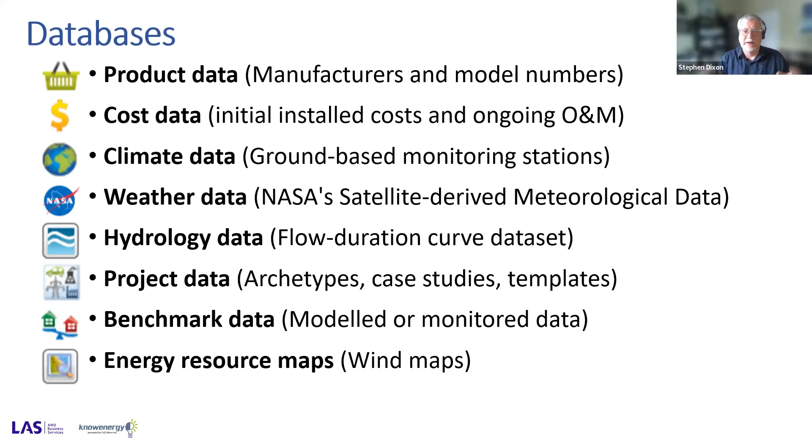Even things like hydrogeology data or hydrology data. If you have water courses in your municipality, maybe you want to look at the potential for hydropower at those sites. And there's actually resources in there for that. Benchmarking data and actually project data. I'm going to feature that one a little bit. Archetypes, obviously, case studies and templates. Lots of good built-in help. So that's the complete toolbox.

A quick little look here. So I'm not going to dive into any particular project right now. I'm just going to open up RETScreen. That's what it looks like when you open it up. It's going to give you a little bit of a tour of what's available. Right in the center, we call this the workflow wheel, or the workflow. It is basically all the things you can do and how we suggest you use RETScreen in the most fulsome manner. If I was doing an audit today, I'd use RETScreen. If I was developing a net zero plan, I would definitely use RETScreen.

So it can take me from the beginning, where I'm starting to gauge where I am, and benchmarking. It will take me through the smart project identifier. That's basically what the virtual energy analyzer is, but also the feasibility analysis in RETScreen, where I can determine how much energy is being used in my base and my proposed case, and my costs for my retrofits, and come up with my emission savings. A very powerful financial analysis tool, including, if you're doing large projects, risk and sensitivity analysis, very powerful.

And then eventually, once you've done that project, you've made that intervention. And for me, a project can be anything from awareness with people all the way through to a big project where you retrofit the building, deep retrofit, low carbon, or maybe put in renewables, or all those things.

Then we can actually measure data and do the analysis to report on the results, and continue that continuous improvement process for the sustainability, the persistence, and the energy efficiency of our building. So that's kind of all the bits and pieces there.

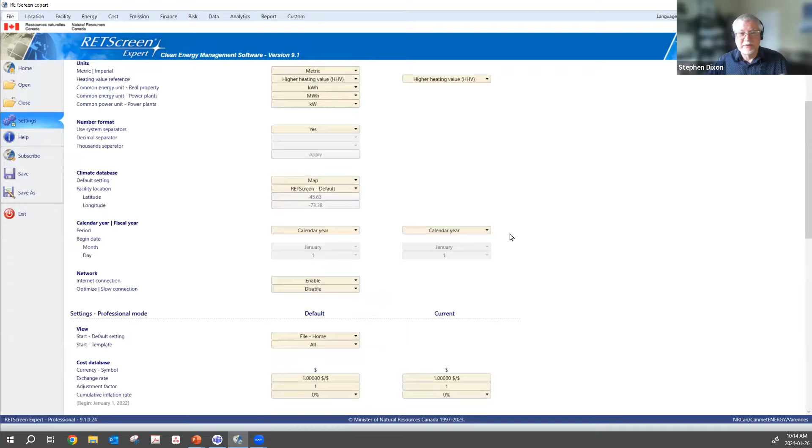So if we don't want Varennes, which is where RETScreen is based, as the default weather station, we can put the default weather station in here. We can build the units and different things. We can build in financial parameters. So for our organization, we have set assumptions around escalation, inflation, discount rate, and so on. Those can all be defaulted in here.

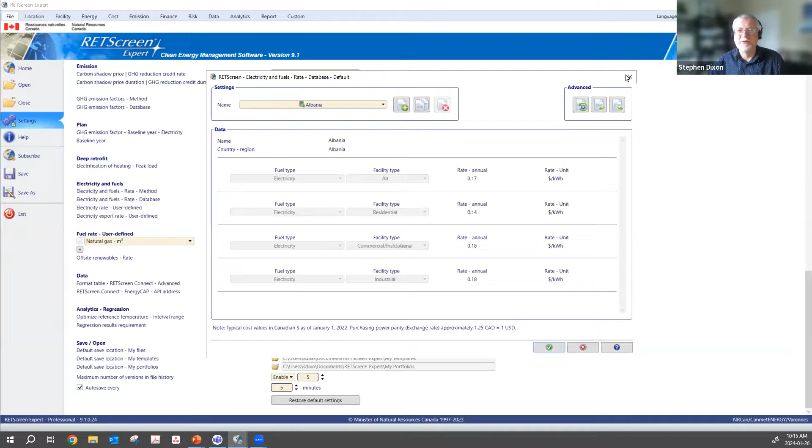And also, it has some neat facility in this latest version around the price of energy in different places. There's a database where we can look at the price of energy, electricity, natural gas, the world over. And if you don't like one of the ones in here, guess what? You can build your own database and then use that later on, so you don't have to keep retyping those numbers. Very useful. Using the right price in your calculations is important.

Using the right carbon factors in your calculations is important. So you can tailor the carbon factors. You can go with the default values, or you can build your own database of emission factors for the different fuels and electricities that you're actually using. So out of the box, it works. It's got what you need. You can then dig deeper and tailor it.

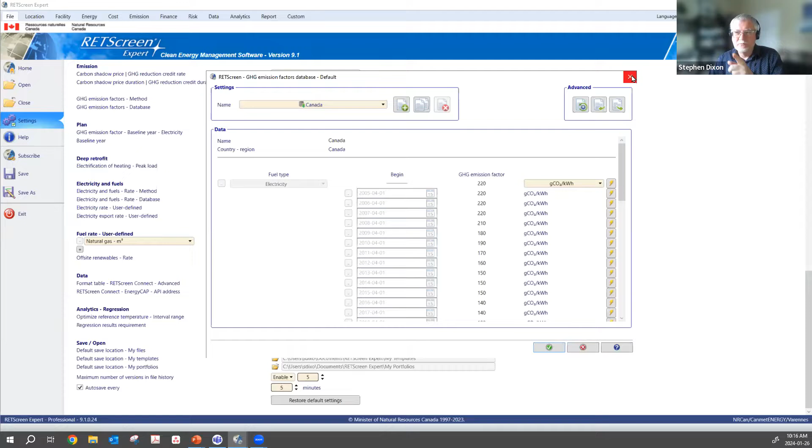I worked with Greg and Kevin and one of the developers over the years. And the philosophy behind RETScreen is you can start with it today. You can get an answer and go, that answer looks promising, okay, I can dig in now and tweak the numbers. So you don't have to build these databases to begin with. But if you're concerned they don't match your situation exactly, you can dig down, put them in, and your analysis will inherit those new numbers. Get in the ballpark and then focus down on the real answer.

And the other neat feature is its ability not to lose data. It'll store many versions, so it's like a master rewind in the file. So if you go, an hour ago I had the answer and now I messed it up, but I saved over top of it. No, you didn't, because mine's set to 5 saves. I have 5 versions back, so I can rewind over all my mistakes. And if somebody turns the power off in the middle of something, RETScreen will come up and say, hey, I found this file you had. So it helps you be productive, not lose anything and not get frustrated.

So going back to the home screen, there's ways to start projects. You can start them on the basis of benchmarks, feasibility and performance. We're eventually going to go into this virtual energy analyzer. And then you have some help tools here, which I'll feature in a second. And here's where we can access the portfolio. And if you're interested in net zero planning and what RETScreen can do, the net zero plan example is a pre-built example.

Over here on the right-hand side, I typically use it from the left-hand side, but if you want to go in and jump in particular ways, there's examples of projects over here and all the integrated help features. It's a real cool feature. You can see a video of me on the pumping dialog in RETScreen. What do I mean? Well, you've got help.

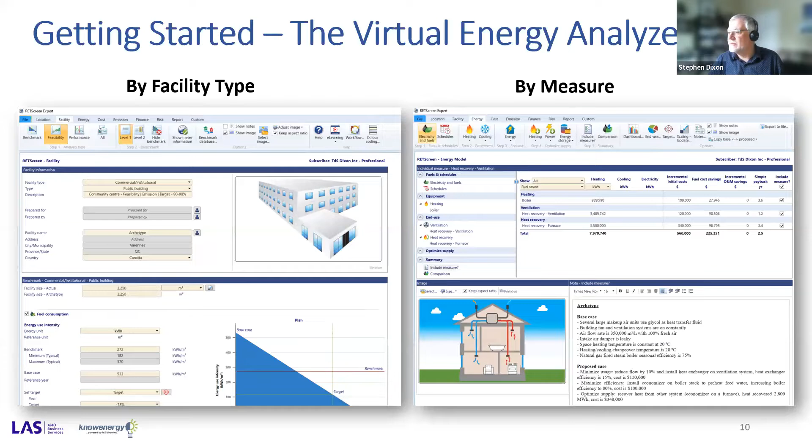Before I do that, though, I'm just going to show you what some of these things look like. So when we get in there, it's going to get pretty busy. So I just wanted to be able to show you that there are two types of archetypes. There is a 40% energy reduction archetype, and there's also then an 80 to 90% emission or carbon reduction archetype.

So these archetypes, again, the definition of the word archetype is a very typical building. That's in this case, right? So these buildings are being built by people. I've built a few of them. Many other people have contributed. So people who are experts in those types of buildings have gone in and said, okay, for that kind of building, I think this one is looking at a community center. So all the community centers they've had experience with, bring it all together, meld it down into this archetype,

and then build a base case and a proposed case, and build a strategy within that archetype to reduce energy by 40%. So if you want to know how you can reduce energy by 40% in your community center, I would open up this archetype and go in there and have a look at what that archetype does.

Now, let's say that archetype is for a building that's a different size than yours. There is a scaling function in here. So you can say, scale my building, right? Maybe your building's smaller, maybe your building's bigger. You can scale it to your situation. Maybe you say, well, I don't have all those rooms in my building. You can remove building rooms, you can add rooms, right?

So you can go in, and then once you've got that archetype to begin with, you can start to tailor it to your situation. I kind of liken it to sort of playing energy games, but it's not a game. This is very real stuff, but it gets me there where I don't have to build it from scratch. Eventually, when you look at those enough, you're going to be able to build things from scratch, right? But this is a great starting point.

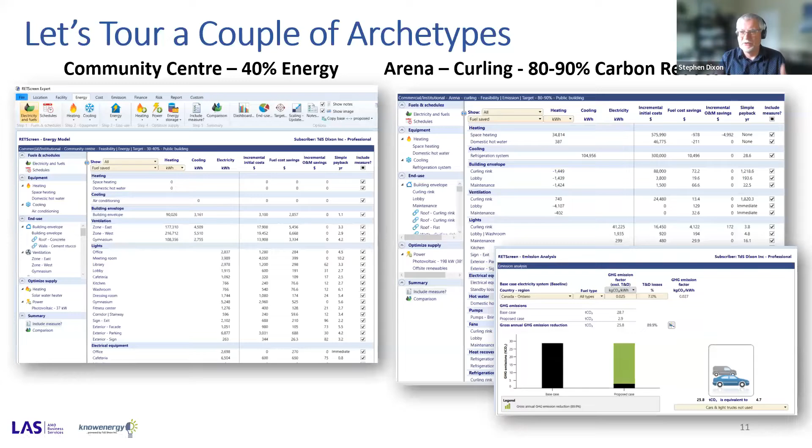And that is for a curling arena, right? So the building that we were looking at there is a curling arena. I'll try to remember to go into those same ones when I dive in there, just show you how it works. And the result is, well, ultimately carbon and cost, but I'm going to show you those screens when we jump down there. So let's just take a quick little look in RETScreen here again, watching for questions or anything. Yeah, the slides will be going out.

Yeah, for sure. While you're doing that, there's a couple of questions just so you're aware. We'll probably cover them off, but just so you're aware they're there, about which database RETScreen uses for GHG emissions, and how can you perform climate resilience of the assets using the software, and weather normalization. What is the meaning of weather normalization? How can you do climate resilience?

What you could do is you could actually create climate examples or climate data sets, which represent the worst case, the best case. Now, when you talk about climate resilience, is it just temperature? The other thing about climate resilience is things like, is your building able to be resilient to a flood that may occur because of excessive rain in your area? So RETScreen doesn't deal with that side of it, but you can definitely test the sensitivity of your model to extremes in temperatures, right?

And going forward, obviously, a lot of people in the eastern part of Canada, to tell you the truth, never had air conditioning. But part of climate resilience is making sure that people don't live in hot conditions in the summer, adding heat pumps, adding air conditioning. But we can also model the impact of that by looking at more extreme temperatures in our climate database as well. So in that sense, yes, you could do that. Any other one there, Adam? There was one about which database RETScreen is using for GHG emissions.

I believe you'll probably get to that once you get to emissions. Well, yeah, actually, I'm going to ask somebody from RETScreen to pop that up there, because that's a good question. RETScreen does populate those databases, the emission databases, and we will see the factors that I had in there before. But the actual source of them, I don't want to quote the wrong source, how RETScreen populates those. So I'm going to set that question aside and maybe get that answer. Or if somebody from RETScreen's online, they can put that answer in there.

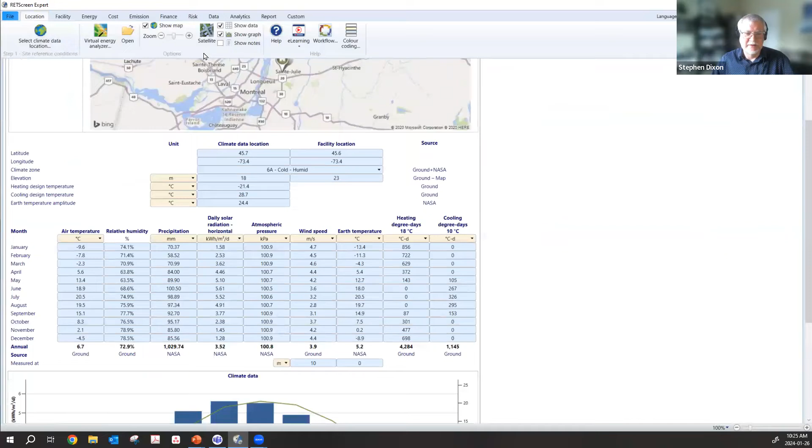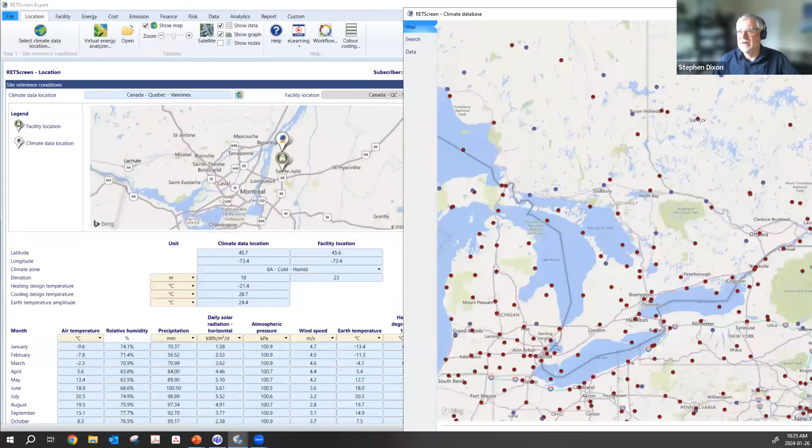When we're doing feasibility analysis, we're using basically a climate database, which is essentially for any site on the surface of the Earth that we can click into and tell RETScreen that our building is located at. So over here, I actually do this when I go into the analyzer. I get to pick a location. So we use one of these red, or even there's a few places of these blue weather station or climate data stations. We can use those. And our project will be essentially run at that site.

But if we get into performance analysis where we have different weather month over month, day over day, that's where we use the NASA database to generate real-time weather data and normalize for that in statistical methodology. And I'll make a reference to that one as we get into the performance analysis.

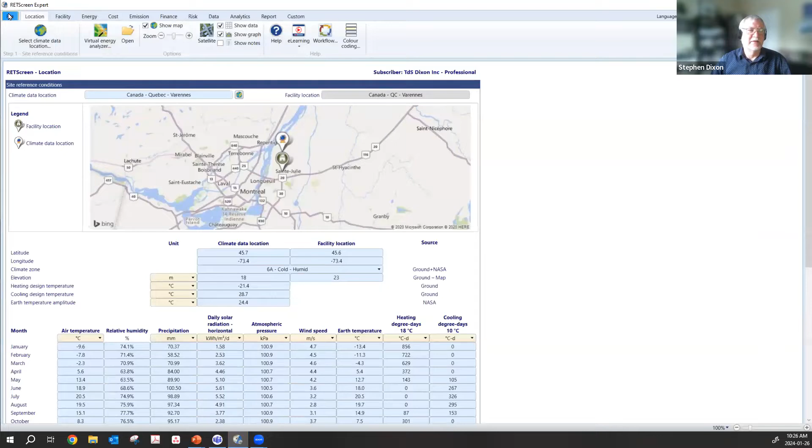Okay, so we're back here. How do we access these archetypes? I've talked a lot about them and the value of them, and I just have to click off on my weather database here. There we go. Okay, so how do we start this? Well, we could click on this virtual energy analyzer here on this screen, but I'm going to go back here. I'm going to click on it over here. So the very first screen, top of the getting started options, obviously, is the virtual energy analyzer. So we're going to click into this.

Okay, so it says, what do you want to do, Steve? So where do you want to be, right? And what kind of building do you want to look at? So I can actually search anywhere in the world, just like any map program. You can do that here. So the kind of building I want to look at, I'm going to go look at a commercial institutional building. So municipal buildings, obviously under the commercial category. And I'm going to go in here.

You kind of have to search around sometimes for these things. I can never always remember where these things are. There is a data center building in here. I know that was something somebody asked about the other day. I'm going to go to public building and let's see what I get here. So under public building, which obviously is where I would start for municipality, I have my choice of a number of buildings, okay?

So if I'm looking for an archetypical building with a 40% energy reduction, then I have my choice of a curling arena, a hockey and skating arena, a community center, or a convention center, all right? If I'm interested in a deeper retrofit, that 80 to 90% emission reduction, then I'm looking at a curling arena, a community center, and a convention center.

So I showed you a little earlier the example, which I think was a, what was one? The community center, 40%, 30 to 40%. So I'm going to pull up this community center to begin with. So I select community center. Now, you might ask, what are these stars up top here? Well, they basically tell us the quality or the wholesomeness of the archetype.

Some of them, like for example, there was the one for the data center, and you'll notice it's only a two-star archetype because it's just benchmarking. I know that RETScreen is working on that archetype, so it will probably be enhanced with an energy base case, energy proposed case, and eventually costs. So it just tells you how much data is in these archetypes. I always like to work with the 5-star, but there's probably some opportunity to work with the lesser ones too.

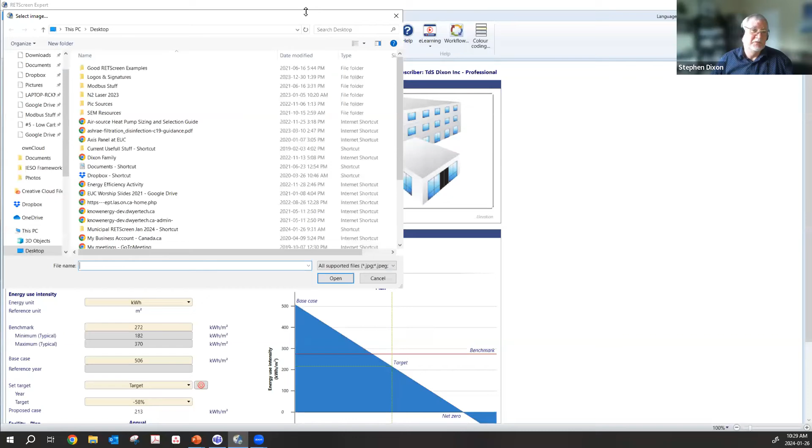We see a picture. If you don't like the pictures in RETScreen, you can put your own pictures in. You can go select image and go grab a picture, right? You can grab a picture of yourself if you wanted to and put it in there. But basically, you can tailor this thing to your own purposes. In fact, in a lot of cases, you have things called notes too.

So I could click on this, and let's say that I wanted to actually modify this archetype, and I can describe what I've done to modify this archetype. So I can put my own notes in there as well. I can turn that off if I don't want to see it. I can turn off the image. There's a lot of cool things, okay?

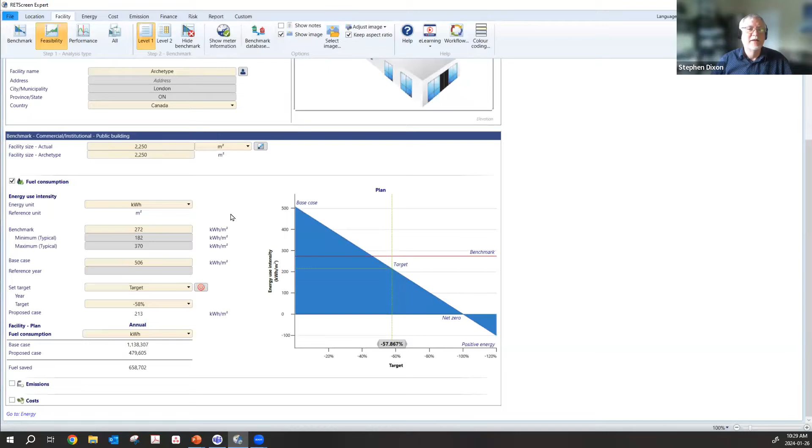I can look at the benchmark database where these benchmarks came from in RETScreen, right? So I can go in here to the benchmark database and say, okay, where did it get this benchmark for this facility from? So I have access to a pretty extensive database of archetypes, well-researched and well-linked over here on the right-hand side within RETScreen.

So this is where the benchmark of 272 kilowatt hours per square meter, or about 25 kilowatt hours per square foot, comes from for this type of facility, a community center. All right, so what does this building actually look like? So let's go dig down here, from a physical perspective, right? Well, we can cruise down here.

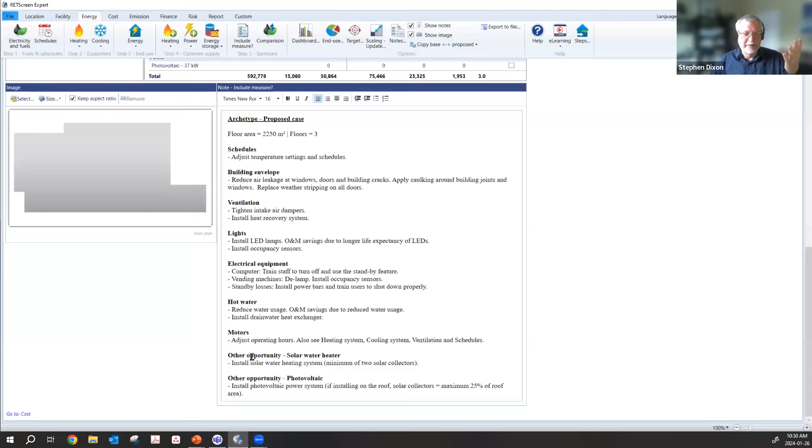This is the shape of the building that was actually modeled. Kind of looks like a lot of community centers, right? It's not a square box. This is the proposed case that they're modeling. So this is what the building is going to look like after it gets retrofitted. All the equipment they're putting, adjusting schedules, building envelope, ventilation, lights, electrical, lots of measures, all the way down to putting a solar water heater in and putting a photovoltaic system in as well.

All right, let's have a look at where some of those things might be. Well, when you look at RETScreen, it's a bit busy, okay? The first time you look at it, you're probably going to feel overwhelmed. First time you look at it and you don't have any data, you're going to go, well, what do I do? But that's where I go into the archetypes and pick a small archetype. If you do it the first time, you know what? Pick a house, right? Or pick a very small building because you'll have less things in there.

I picked the community center. It's probably medium. Some of them are very long, but some of them are very short. So pick one that's easy, kind of get your mind around what's in there. But you'll ease into it, and I think you'll warm up to it pretty quickly.

Can you pick your own house, Stephen? Well, I can't pick my own house, but I could build my own house. I always tell people, if you live in a house, many people don't today, but if you're privileged enough to live in a house, get your electricity, get your gas bills, right? Figure out how much energy you use in the year, and you can actually enter them in here, right?

You can stick in your electricity and gas bills, your historical consumption, and then RETScreen, as you build the model for your house, will accumulate the values, and when you get within 10%, that's pretty good. You're modeling your building maybe 5 to 10%, right?

I would suggest if you're going to try to do a whole building model in RETScreen, if you live in a house, try it on your house. If you know of a small building, just a small building, 5,000 square feet, 4,000 square feet, try it on that, right? Don't try to model a massive building to begin with because it will overwhelm you. But once you've figured out how to do it, you can then scale it. RETScreen operates on scale.

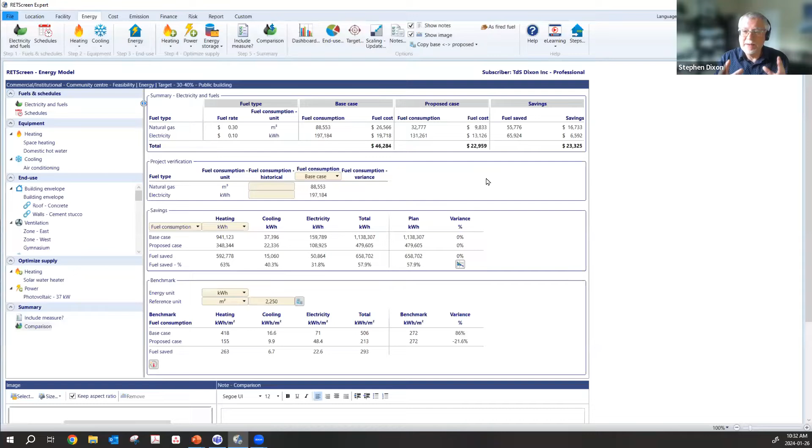The other thing about RETScreen a lot of people ask me about is, Steve, well, where's the interzone transfers of energy? RETScreen is not an hourly simulation, and there's a real virtue in that, right? Because I don't have to gather a lot of information. RETScreen accounts for all the energy flows into and outside of a building, and that makes it easier for you. It requires less data. And for many, many purposes, not every purpose, that's all you need to do, right?

So don't take RETScreen for what it's not. Don't overthink what RETScreen is doing. But when you think about what it really is doing, you go, well, that's useful, okay? And if you ask me about RETScreen and I tell you it can't do something, I'll be honest with you. There are certain things I wouldn't use it for, but there's a lot of things that I would.

All right, so let's just have a look here. We're back on what we call our include screen, where we get to see everything in the building, right? I can say this is the fuel saved right now. These are all the projects that are in here. All these projects combined have a payback of 3 years, right? RETScreen tells me that right away.

Let's say I want a quicker payback, and I look down the list here. There's some things with long payback, right? Meeting room lighting. I'm going to turn that off because that has a longer payback. So now my payback drops by 0.1. Is it worth doing that? No, let's leave it in there. Let's get all that lighting retrofit done.

But you can tune the package of projects that you have in here, right? And as you do that, you'll arrive at a reduction in carbon. Now, this one actually says it's a 30 to 40% energy reduction, but it's actually a 62% reduction in carbon just because of the mix of fuels.

And we have a beautiful financial model, right? We do a level 2 financial analysis, which is really basically life cycle costing in a nutshell. We put out money, we have the cash flow graph coming back here. We see basically a return on the investment, which happens relatively quickly here. We can also model financing in here. We can say, let's borrow some money to do this project at a certain interest rate. Hey, use other people's money to do energy efficiency.

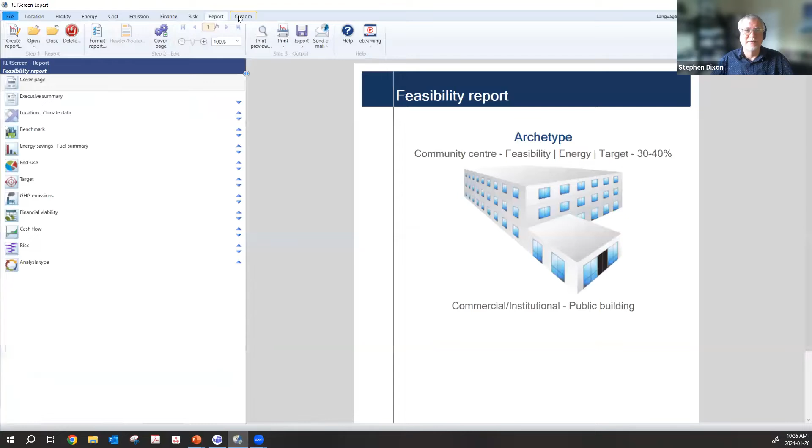And then I mentioned that risk analyzer, it's all here. There's also a report writer. You click in here, you get a predefined report that you can go and print as well. And again, if you're building your own model, you get to do this exactly like you're building. Now, what I'm not going to show you right now is there's a custom dashboard generator here, where you can take anything in RETScreen and put it on there. It's all dynamic and it prints. I might have a chance to show you that when we get to the portfolio. There's a wonderful portfolio using the custom dashboard.

It's a great kiosk tool to display on. You can put it in the lobby of a building. You walk into your admin building, right? And City Hall, and you see all the things going on, right? The RETScreen is managing for you on that monitor. Great way to use RETScreen.

Okay, so I'm kind of digressing a little bit, but what I was trying to show you was this 30 to 40% energy reduction archetype. I'm just going to jump into a particular case. I'm going to look into, okay, how do you model the heating system? Well, in this case, we're not changing the heating system, but we have to have one in the base and the proposed case.

Now, there's the video learning. I can click on that, and I don't think it would be me on this one. It might be. Yeah, it probably is, actually. There's other people in there, but basically you get to see somebody talking about this particular dialog box. Now, maybe you've got more than one fuel in a building, so you can actually deal with that. Maybe you're dealing with a heat pump.

I've got a slide later on where we show you, 70% of the load is carried by the heat pump, 30% by your peaking conventional natural gas heating system, right? You can get 90% reduction in energy and carbon, right? But basically, you can hybridize it. So RETScreen has the ability to build a hybrid system and allow you to model those multiple fuels as well. If we were changing the boiler to a heat pump, this is where we do it. And I'll show you that view later on.

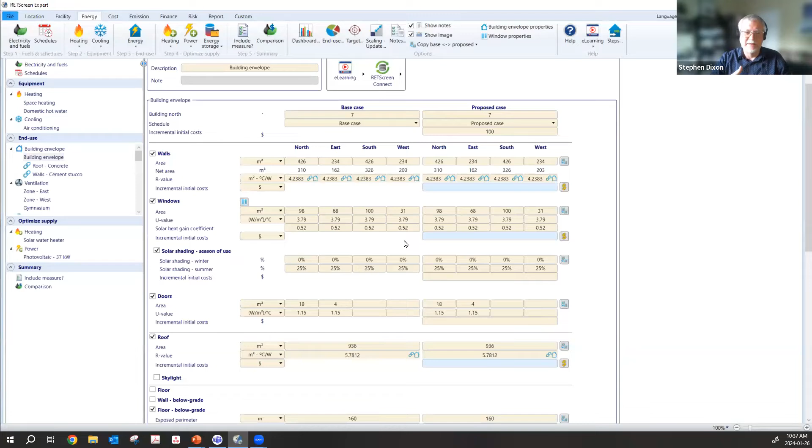You can have multiple building envelopes. So you can model some very complex buildings in this thing. Very good. You can also model thermal penetration, where you've got a slab edge going out through the insulation. There's some really neat features in here. I mean, we could spend all day just in this model. But again, have a look at these things. I'll show you one example of using this in a few minutes.

All right. So let's go take a look at another archetype. So this time I'm going to go up to File, going to click on Virtual Analyst. Now it already knows where I am, so it remembers that. But now what I want to do is pick up the deep archetype, the deep carbon reduction. I'm going to go to arena curling, 80 to 90%. So we're really going to town here now. Okay. So I click on that. So you can see, it's pretty easy to do this. You can tour around this thing, right?

Now, RETScreen's also really good at avoiding you losing data unless you answer the question improperly. So I don't care what I changed in there before, but I might, and I need to answer this question properly. But at this point, I'm going to say, no, I don't wish to save my changes. So it's going to dump those, bring the new ones in.

It'll take a second to construct the archetype, look at the location, do all the things that make this archetype relevant. So in this case, it's actually probably making some decisions around whether we stick with a natural gas system, whether we get electric heat, whether air source heat pumps or ground source heat pumps. So it's actually making a bunch of sophisticated decisions. And you go, where did I learn about what those decisions are, Steve? I'll show you that in a second.

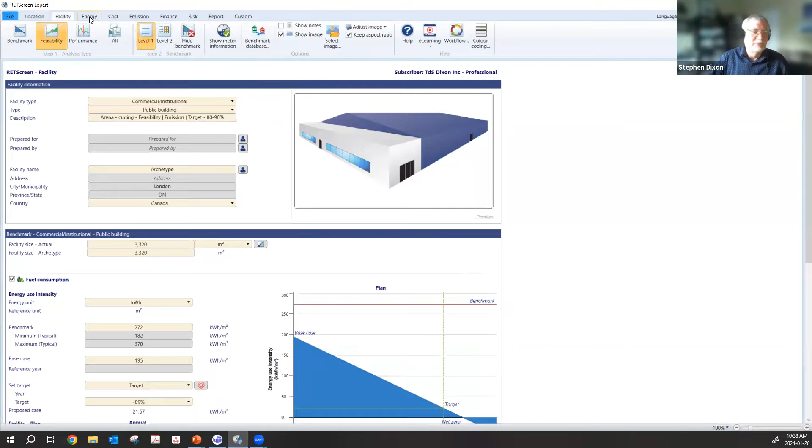All right. So basically the same screen that we saw before. This doesn't look a lot different. But when we get to energy, it's going to look very similar, right? Less on the lighting side here. But now if we go down the bottom here, we've got things like heat recovery on the refrigeration system and the curling rink, and we've got a photovoltaic system covering 38% of the roof, right? So cool. Let's just prove the emission reduction. Look at that, 90%, 89.9% emission reductions, right?

And there's a financial case here actually for this. If we look at this, well, maybe not. Okay, that's the thing we have to realize, and that's the thing that RETScreen can help you to do. Trying to get a simple payback out of a 90% reduction in carbon is going to be difficult, but we have to look over the life cycle of the building.

Christian, we've done some great workshops on this. You've done some fire hall work down in Middlesex Centre, where we looked over 30 years, and we didn't look for the simple payback. We said, over 30 years of the life of this building, considering all things, and you can do this in RETScreen too, which is going to be the least cost option? It turns out that the low carbon approach is the least cost option, but you have to consider things like recurring costs over time, periodic costs.

In the financial model in RETScreen, in the costing model, I'll just show you this very quickly. We haven't used it here, but this is very basic costing, right? Then we go into a much more detailed costing, where we get to talk about lots of different things. And down here we have periodic costs. So we can add costs in over time, in the 5th year, the 8th year, whatever, to retrofit this building, so we can deal with those maintenance costs.

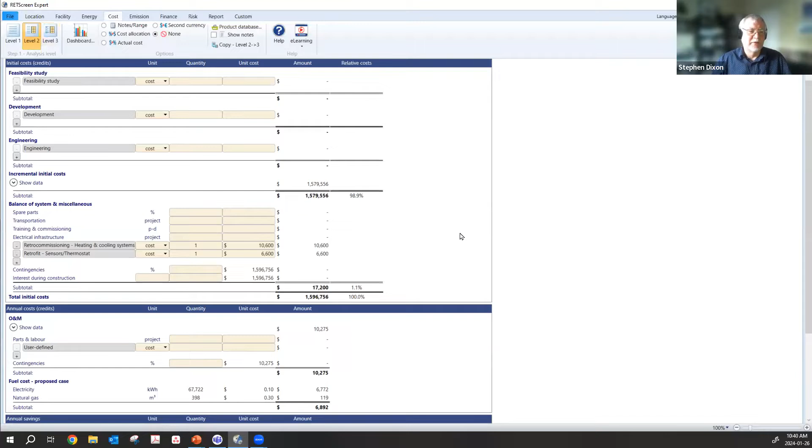It's not just a matter of the capital cost up front and maybe an annual O&M cost and then the savings. It's a matter of actually dealing with a lot more of the detail. And again, RETScreen has this in here. And let's see what's under the level 3 analysis. It might even have a little bit of a design or costing for the ground source heat pump if they use one here. So no, it doesn't, but it could be in there.

So the neat thing about these archetypes too, if you look at them, you can look at the financial analysis on what we call level 1, or the costing on a level 1 basis. Very simple. Or we can go to level 2, level 3, so dig down into these things. There's a lot more detail in them as well. All right, let's go back and have a look at this.

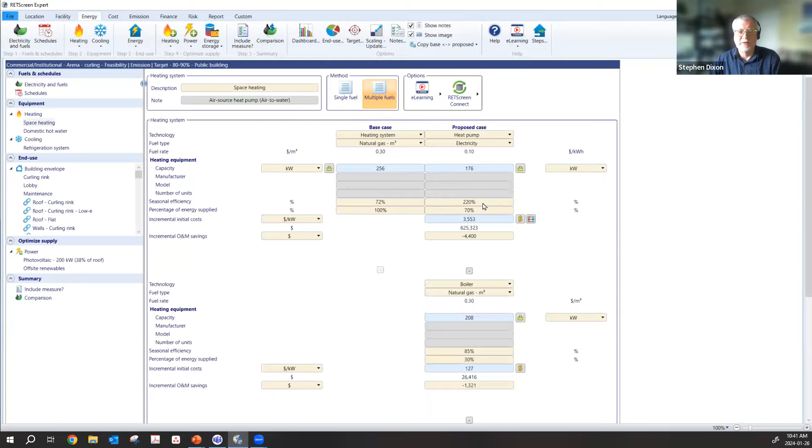I'm going to go back to the space heating system. Before, it didn't change. In this case, it did change, right? What do we do here? Well, we're going to deal with multiple fuels. So we've gone from a natural gas-fired system to a heat pump running on electricity. And looking at the COP here, I would say that's probably an air source heat pump with a 220% seasonal efficiency, which is equivalent to a COP of 2.2. And it's taking 70% of the energy, whereas 30% is provided by that conventional boiler. So there we have a hybrid system, right? So these archetypes are really rich.

Now you go, Steve, okay, so what's all the detail in behind this? Well, here's where you're going to find that out. We go to our include screen, which is where we get to see all the results. And I'm not even scratching the surface here. We go down the bottom here, read this in detail. I'm not going to go through it right now, but this is where we see the intelligence of the virtual energy analyzer really emerging, right?

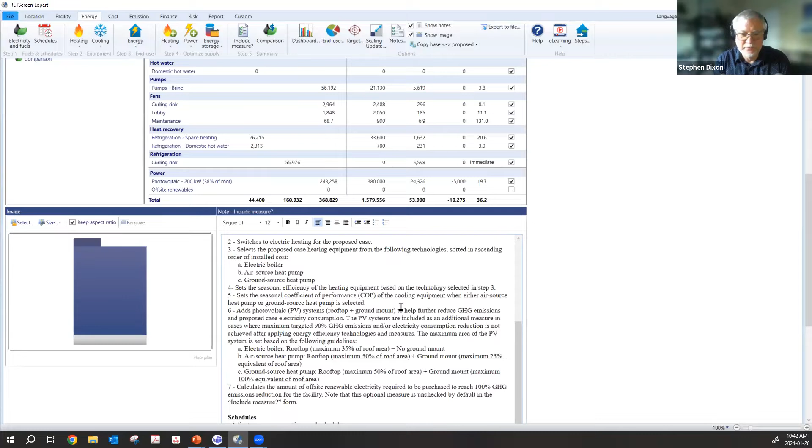Because in here, when you ask it to build one of these things, it goes through and makes decisions based on your location and the fuels and so on, about what is the best combination of pieces. So this isn't just somebody's built this and brings it out on the screen. It looks at your location, it looks at the weather, and it says, what is the best system to go in this situation? Starting with the natural gas, the electric boiler, air source heat pump, ground source heat pump. And then it even looks at the use of PV or offsite renewables as well, right?

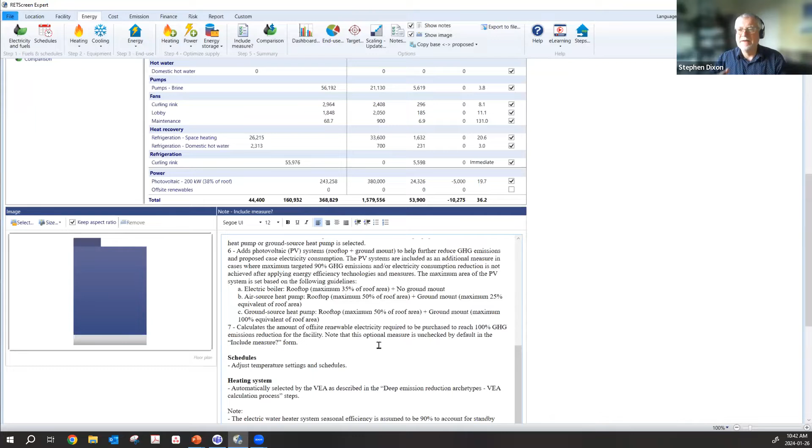So it comes up with a combination of interventions which is going to get you to that 90%. It's not just somebody built a 90% archetype. So have a look at it. It's really valuable. And eventually when we get to the net zero planner, this comes into play because the same logic is applied and we can build it into an entire portfolio of buildings. All right.

All right, so the last thing I wanted to show you was if we're going to the virtual energy analyzer, maybe we won't look at a facility, maybe we just want to look at one project, right? So I'm going to click into individual measure here. I should be able to find it right here. There we go. Okay, mouse doesn't always work well on Friday morning. Okay, so here's all the individual measures we can look at.

Whoa, look at this, right? We can go in here and we can say, I want to do an individual measure on pumps. Okay, there we go. And maybe it's a circulating pump on my chilled water or my heating water, a variable speed pump, or maybe it could be a domestic water pressure booster pump. Maybe it's just replacing the pump with a more efficient pump, right? So there's lots of different variations of modifying a pumping system to be more efficient. All right, so there we go.

Now, this may or may not require weather data or climate data. If it's a building envelope, it would, but here I'm just going to click it anyway, and it's going to use that location that I had. No, I don't want to save the changes. So we're going to go ahead and do that. So the point about this virtual energy analyzer thing is that there's so many pieces in here. You don't have to go in and start to build. Once you bring up a building, you can use it to inspire you.

Maybe you just take it and say, listen, we got 5 or 6 buildings in our portfolio that look very similar to these ones. This is the strategy they took in this virtual energy analysis, these archetypes, and eventually in the net zero planner. And we can tweak some of those things. This is what it would take to get to 90% carbon reduction in these buildings. And maybe your colleagues in your municipality go, wow, that's good. I mean, you can hire a consultant to do this eventually, right? But you can go a long way with a tool like this to really explore what could be done and what the financial results are going to be, and even looking at the risk and sensitivity piece as well.

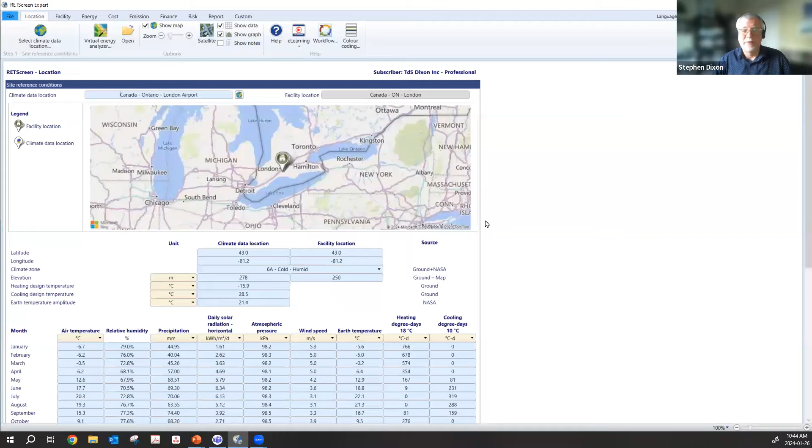All right, so I picked up a particular example now of a project. There we go, little pump project, right? Putting a variable speed drive in a pump. And RETScreen is going to look a lot simpler here, right? There's my archetype. There's my pump. 1.2-year simple payback without incentives. Well, that's probably not unusual.

It's funny, I walked into a community center a little while ago, well, you were with me, Christian, 4 or 5 years ago, and I joke about, show me your least reliable pump, and I'll probably show you a way to improve efficiency. And the operator of the building said, well, we got this pump down in our pool room that has to be rebuilt every 3 years. So we went down there to have a look at it, and this gentleman really wasn't a believer in this energy thing to begin with. You remember that, Christian, right? He was pretty skeptical. Yeah.

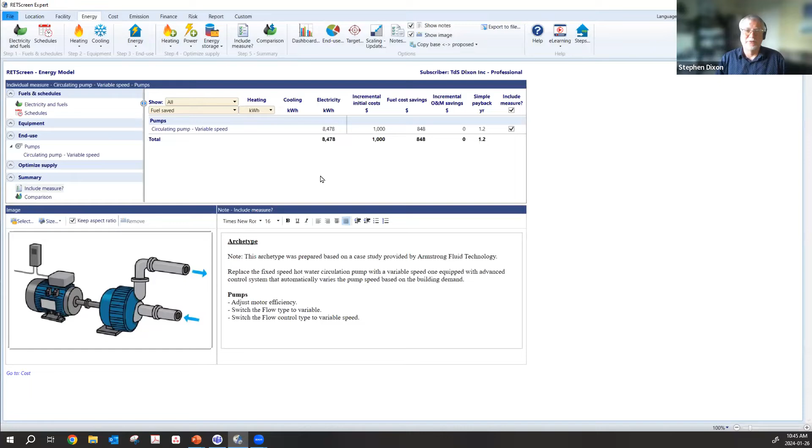He was pretty skeptical. We got down there, and I looked at the pump, and there was this massive valve on the discharge of the pump. It was the main pool circulating water, and they were using a valve to control the flow. They'd thrown it off its curve, and they destroyed the efficiency, and they destroyed the pump, because that causes a lot of problems when you throttle a pump like that, right? This is a perfect example of the same kind of project, maybe not as big, but I can jump in here and go through and say, okay, this is my pump.

Now, RETScreen is actually multilingual, more than just in the spoken word, but also in terms of the units. So I can actually go with metric or imperial units. So a 2.2 kilowatt motor in Europe is actually a 3 horsepower motor in this country.

RETScreen can mix and match units. If you get hung up on units, don't worry, RETScreen's got the solutions for that. So I can go through and look at going from a constant speed pump that's being throttled to a variable speed pump in what we call the high flow range, above 50% most of the time: 53% reduction. But maybe we're heavily throttling this pump. Maybe we're running at the low end, and if we go to low, now we're going to get savings of like 75%. So in a few clicks, you can explore the feasibility of some of these projects.

You go, okay, I'm convinced, like the gentleman was in that community center, let's go in here and actually get a bit of information for our pump. And now we can build a business case for our pump within a few clicks. Honestly, I really, truly believe that. You got your cost information in here. Oh, what if I don't know what some of these things might cost, right?

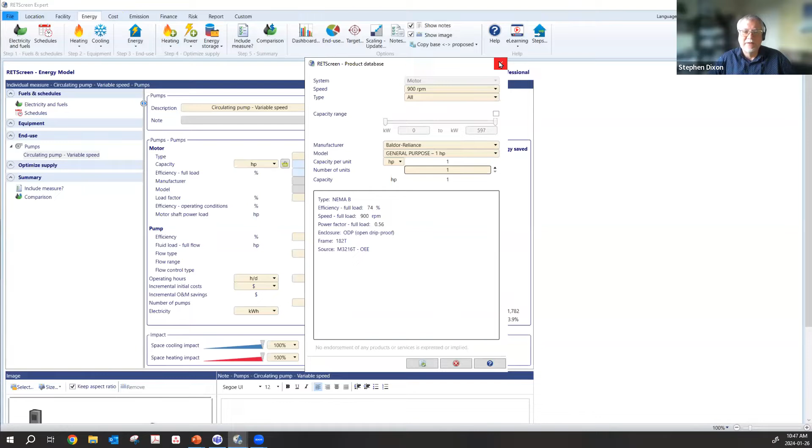So maybe I'm going to go to a more efficient motor. So I have a product database that I can use here. I can go in here, I can dig in, and it can tell me a lot about the specifications of these particular devices. Or maybe I need to know the cost of doing some of these things. So I'm going to go to the cost database, and here I see the cost of different kinds of pumps installed in different situations. So there's a lot of depth right behind these things. That little shopping bag is the product database, and this $ sign, that's the cost database that we can use.

All right. So, Stephen, how relevant is this costing based on the fact that prices have really shot through the roof after COVID? Well, that's a good point. But you can actually adjust this, because when you go to the cost database, it shows you the basis for the costing. If you go in here and click this button here, oh, sorry, that's the current one, user defined. You can set your own factors.

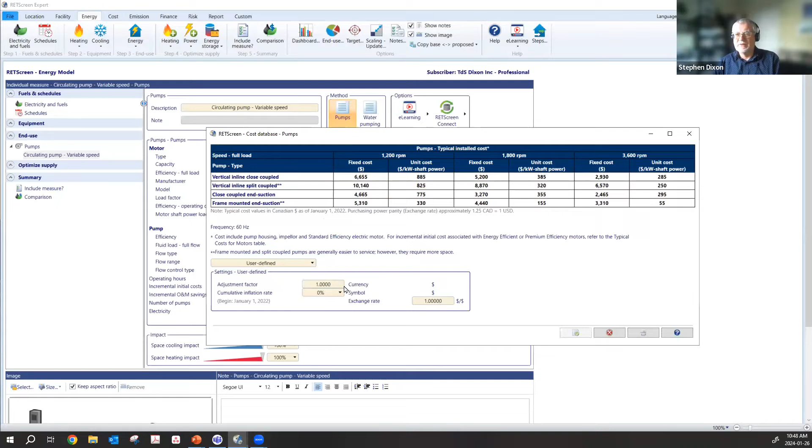So you can put in your own adjustment factors, even cumulative inflation rates. These are correct as of January 2022, but if you want to bring those to January 2024, you can go in and put the inflation rates that might apply. So you can adjust these costs to your circumstance. And if you're in a different country, obviously not everybody's Canada, you can also put in the exchange rate there as well. So it is adjustable. It recognizes that things do change. Right, that's good. All right.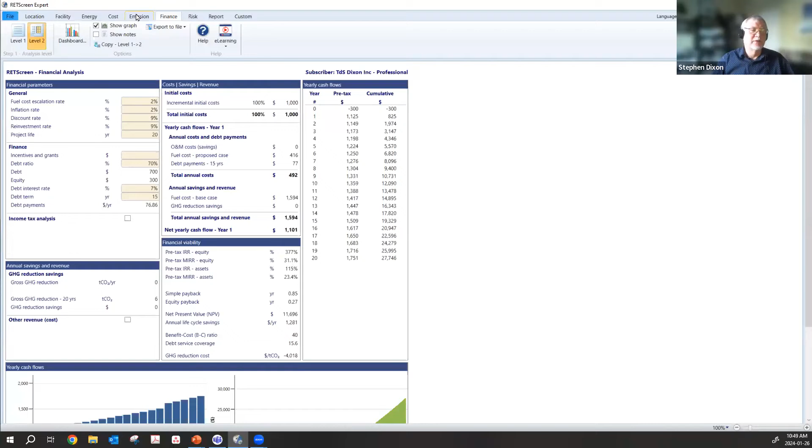Okay. Well, while you're on the emissions and finance tab, there's a question about how to handle the increasing cost of the federal carbon tax. That's a good one. So there's a number of ways you could do that. You could actually put in here a price for carbon, or a credit rate. Or the other way to do it would be to inflate your energy prices, if you have natural gas inflating because of the carbon tax. I've actually done it both ways. Actually, what we should do is put together an example of how you would do that, and we can make that available to folks.

While we're there, there was just one other question to maybe answer live here, about replacing 4 boilers with 2 heat pumps and multiple unit ventilators. How would you do that in RETScreen? Is it possible? Yeah, you could do that. So basically you go over, and I don't actually have it in this one, replacing 4 boilers with 2 heat pumps. So first of all, if all the boilers are the same, you don't have to have 4 boilers identified, because of basically what you would do in RETScreen. Let me just put this in here.

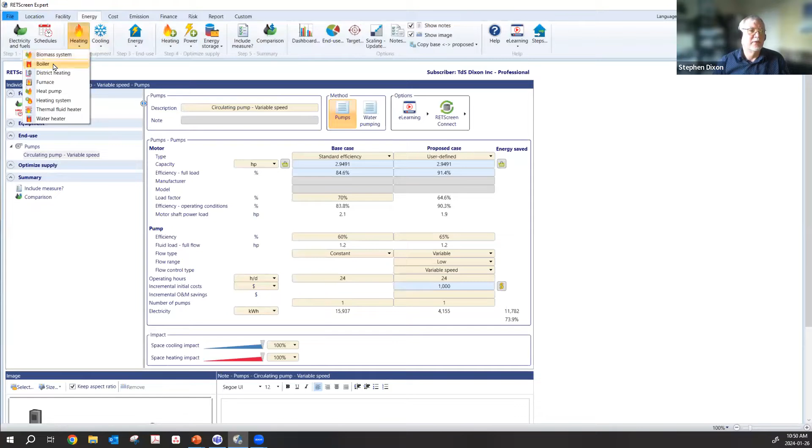I'm going to go boiler. Okay, so basically, let's say I had 4 boilers, and the seasonal efficiency of that combined boiler plant is 78%. We're going to be optimistic here, right? And you were going to replace that with heat pumps.

So I could go over here and I could click heat pump. The heat pump is going to be running on electricity. And let's say I'm going to go with an air source heat pump, so I'm going to be looking at maybe a seasonal efficiency of 200%, COP of 2. So there, I've done it right there.

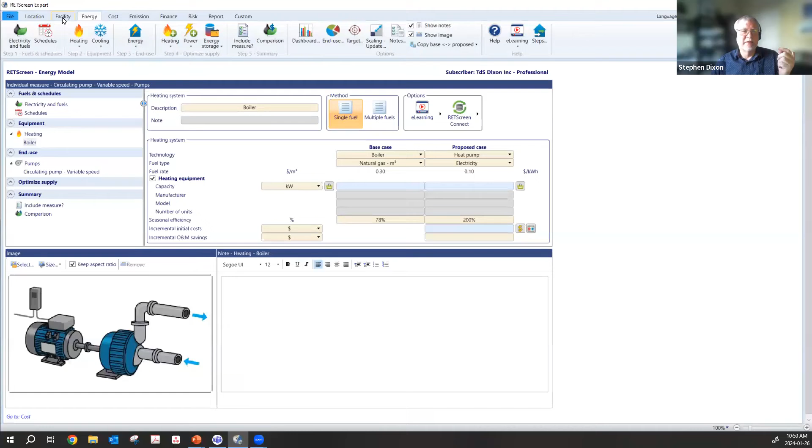Okay, that's it. Now you have to have a heating load on this building, because right now this building doesn't have a heating load. But there are ways to do that. Now there's another way to do this as well, because there is a tool in RETScreen. Go to the facility here. You can actually go to what's called the heating, cooling, power model.

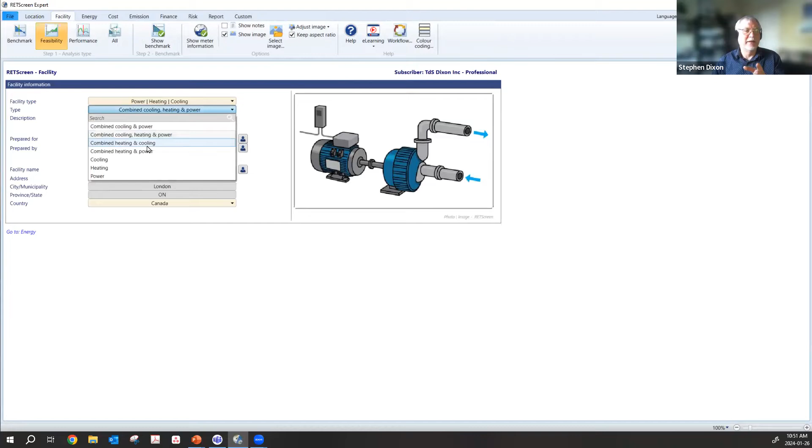I'm going to go back to this one. Here we go. It's always off the screen. There we go. Power, heating, cooling. This model is very powerful if you're looking at heat pumps, if you're looking at even preliminary sizing a heat pump. I'm going to pick combined heating and cooling.

And then when I go into my energy model, what I'm going to see is a heat pump configuration. And now I go to the heating load screen where I can put in my gas boiler. So let's say I'm heating 1,000 square meters, 10,000 square feet. I'm going a bit off of the program here, but hopefully this will be valuable to people. There's my 78% efficiency. I can put in my heating load, say 60 watts per square meter, and it's going to calculate for me the fuel consumption of my building.

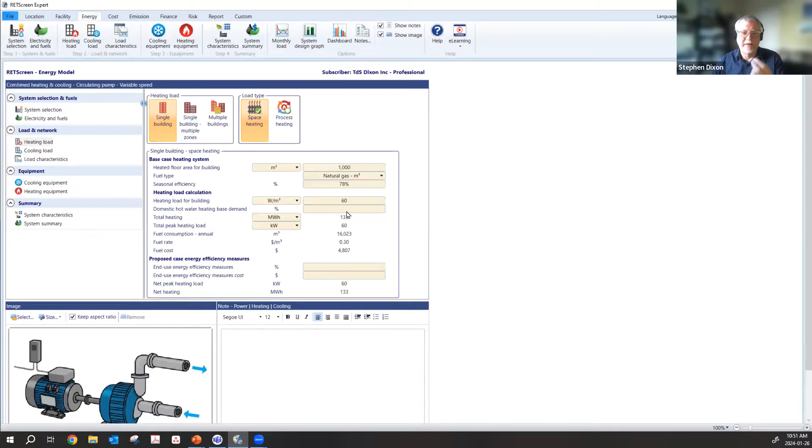I can calibrate this to the fuel consumption of my building. Once I've done that to my satisfaction, RETScreen is going to calculate for me the heating load for that building. There it is, and it's going to tell me the heating load is 60 kilowatts. I can use that information then, and I go to my heating equipment, if I want to size the heat pump for 60 kilowatts of heating load.

Now, I'm not saying this is necessarily the optimal system. It's got an efficiency of 200%. Then what RETScreen will do, if I go to my system characteristics screen, is show me that I've taken all the load to the heat pump and all the economics flow from that. Now, let's say that I want to undersize that heat pump a little bit because I don't want to take all the load on. This actually should be electricity.

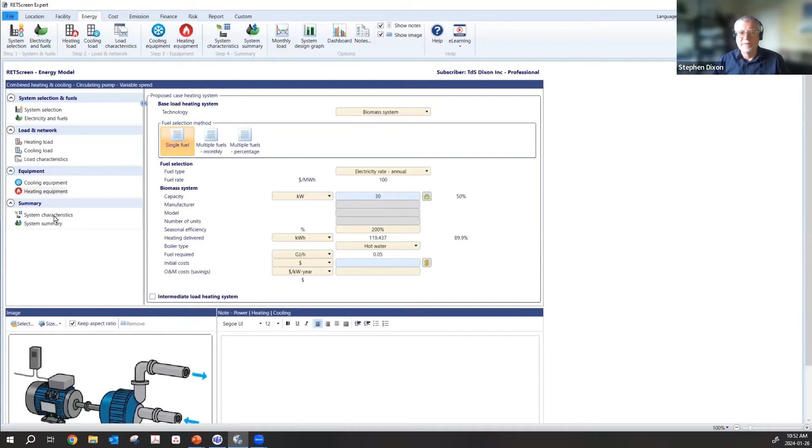So let's say I want to undersize the heat pump. I'm going to go to 30, so I'm going to make it half the load. Now, remember, that extra 30 kilowatts of load is not for a long period of time. So let's have a look at what that does to how much of the conventional fuel I'm going to displace. In this case, the heating delivered is 90%. So 50% of the size gives me 90% of the displacement of energy.

It's warning me I need a peak load system. So I'll put the peak load system in here. I'm going to go with natural gas, and I'm going to leave the system I had there before at 60 kilowatts. So now the natural gas will provide most of the capacity at those peak times, but still the heat pump's providing 90% of the energy, which means 90% of the carbon, basically, overall, depending on the amount of carbon in your electricity grid.

Here in Ontario, it's very low, or in BC and other provinces. If it's higher, then it would be higher. But you can set that. When you go in, you can pick your location, and when you pick your location, the emission factors are naturally picked for you. So I could shift this over to a province where maybe the emission factors weren't so low, like Nova Scotia.

When I do that in Nova Scotia, that's going to have a different impact. Why? Because the electricity grid has a lot of carbon in it. That's changing, but at this point it does.

So again, I can play with where this is, and it takes into account the electricity in the grid, the carbon in the grid, the carbon in my fuel. Hopefully that answers that question. That actually eliminates a couple of slides later on. So thank you for that question.

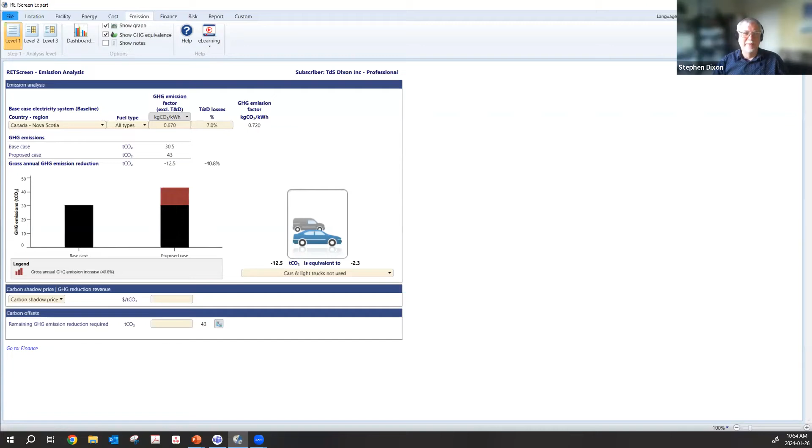Now I do have to keep going. Well, many roads to travel. But again, I think you can see, and there is an archetype around that, right? You can go in there, you've got the low carbon archetype, because that actually does the same thing. And I showed you that before, where you've got the hybrid system, right? You got the natural gas and the electricity together.

That was in the real properties model, but I love that little heating, cooling model that I just showed you, right? If you haven't seen that, if you're a longtime user of RETScreen, a lot of people haven't seen one, have a look at it. It's a great tool for starting to get a rough idea of how big a heat pump I might need. It's got a neat sizing algorithm in there.

All right. I'm getting pretty excited here. I better keep back on the program, right? So I love this tool. I love this tool. Okay. Let's go back now. Oh, go ahead there. We still have a long way to go, so we do.

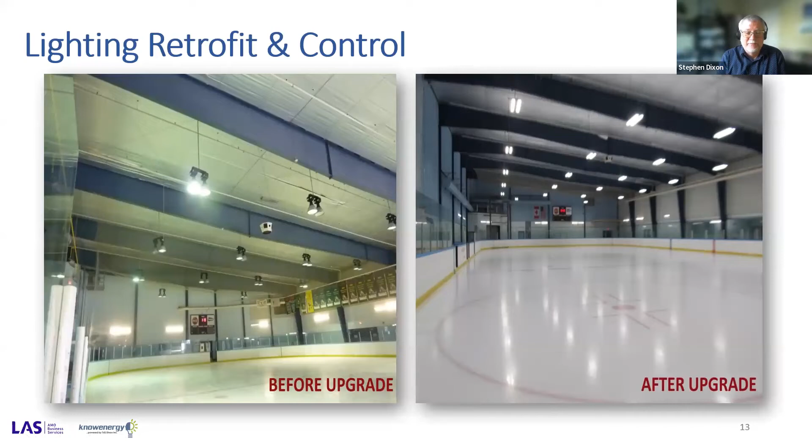That's fine. So what I wanted to do is I wanted to show you a bit more of the feasibility analysis. It's kind of not a repeat, but it just sort of maybe opens up a few more things with some slides. So, LAS have a great lighting program, but maybe before you go there, you may want to just see what it looks like, or maybe you go, I'm going to do it myself, right? RETScreen has the tools to allow you to do that lighting retrofit analysis, right? It's all in there. There are product databases, it'll actually help you to figure out what lighting levels you want, what the characteristics of the different light sources are.

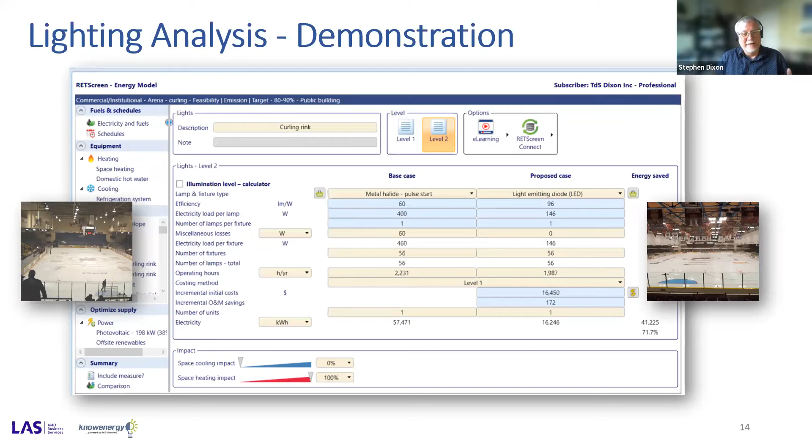You're going from metal halide in that rink to the LEDs. Most rinks have done this. If you haven't, maybe you want to do it. It's funny because I was in a rink last weekend for one of my granddaughter's hockey tournaments, and there were two rinks in this arena. One of them had the old lighting system, one of them had the new. Oh, the difference between the old system and the new was incredible. And I think it really affected the play on the ice surface as well.

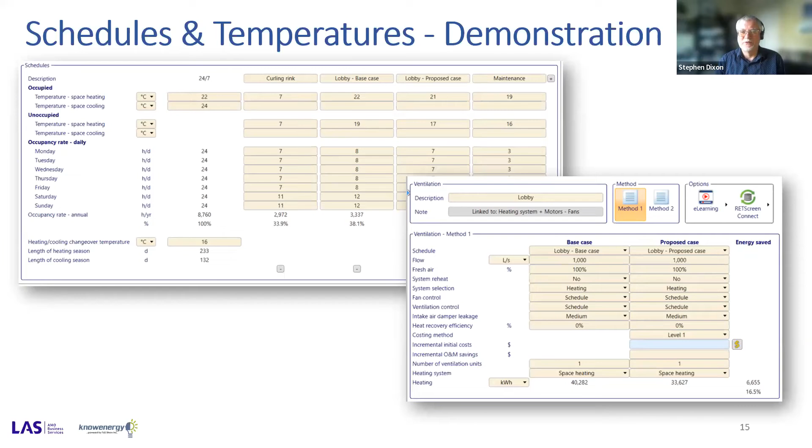Schedules and temperatures. Maybe you simply want to look at changing the schedules and updating your schedules in your building automation. Honestly, we do a lot of treasure hunts, colleagues do a lot of EBCX. Scheduling is still one of the biggest opportunities in there, getting the temperatures right, right? Maybe we want to look at our HVAC systems in a little more detail. Maybe we've got leaky dampers. Maybe we can implement heat recovery on some of those systems.

The ventilation model in RETScreen does give you all the tools you need to do those calculations, right? You know, I'll be honest with you. The calculations that are behind this one are CFM delta T 1.08. There's probably engineers on the line. You all know what I'm talking about. It means the flow times the delta T times some constant is the heat flow that's involved with ventilation air.

That's really the only calculation behind this one, but it's all the little details around, you know, what's the schedule? Are we heating and cooling that air? What's the heat recovery? All those things. That's all built in there, right? But the calculation behind this is actually relatively simple, right?

I learned years ago there were 3 magic formulas in energy, and on the thermal side of it, it was MC delta T, that's the heating or cooling of water, CFM delta T 1.08, that's the heating and cooling of air, and UA delta T, that's the heat transmission.

U is the conductivity, A the wall area, delta T, right? If you know those 3 formulas, you can figure out how much heat is coming into and going out of a building in many cases, right? You need a solar thing on top of that, but that's what RETScreen does. It takes those things and puts those formulas at your fingertips, literally, or at your mouse tips.

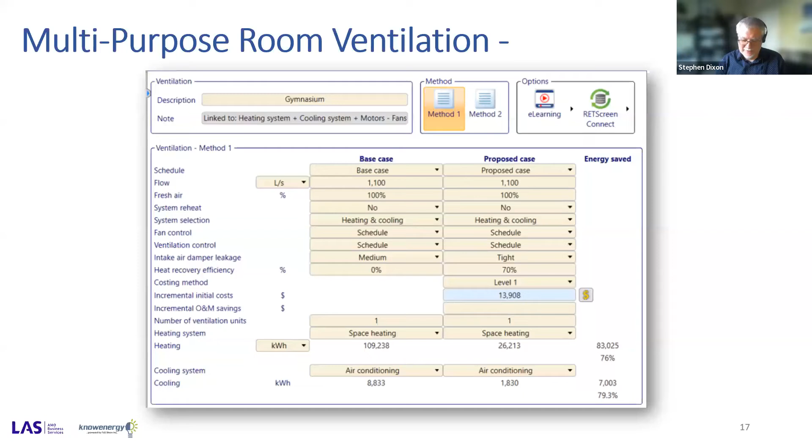All right. I was going to do this one, but I think it's a little bit long in the day to do this one now. But this was the one where the gentleman said to me, Steve, the contractor is asking me whether it's worth putting some more insulation on my building, they were re-roofing. He said I can do R20 versus R10. He wanted to charge the guy $1.20 a square foot.

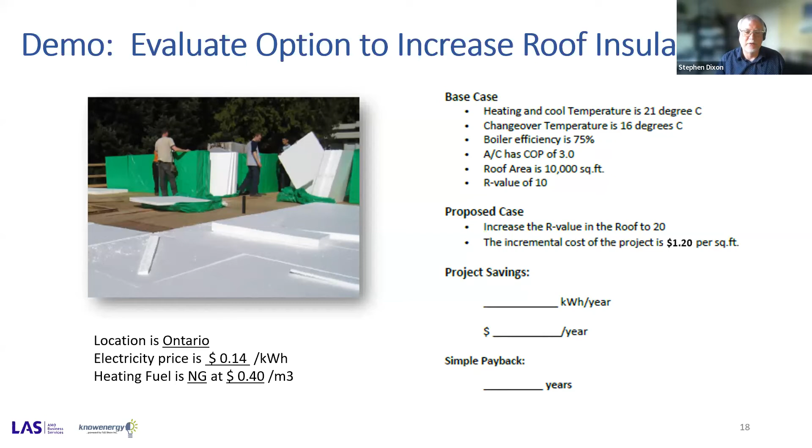Well, is it worthwhile? So I took prices today, 14 cents a kilowatt hour for electricity, because that's cooling, and you're going to save on that, and 40 cents a cubic meter for natural gas. All right, so I did the analysis. 8.6-year payback. Well, $1.20 seems a little steep, no doubt, but you know what? 8.6 years, that roof's going to be there for 20 years. Okay, I'd probably do it.

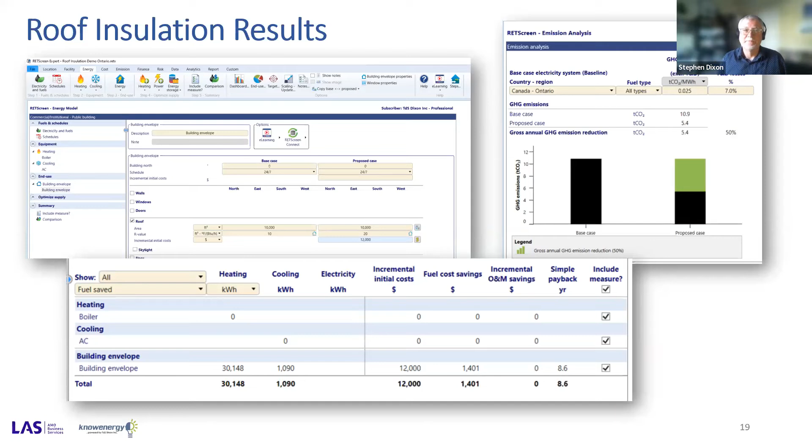But you know what I said to the guy? I said, let's put the price in at 80 cents a square foot. And then the payback was down around 6 years, right, in that situation. He called the contractor back. He said, we'll do it, but I want to pay 80 cents a square foot. The guy went for it. I mean, he had all the insulation right there, right? But being able to make that kind of decision on the fly, and then to know that you've also reduced your carbon by 5 tons too, right? Boom, done.

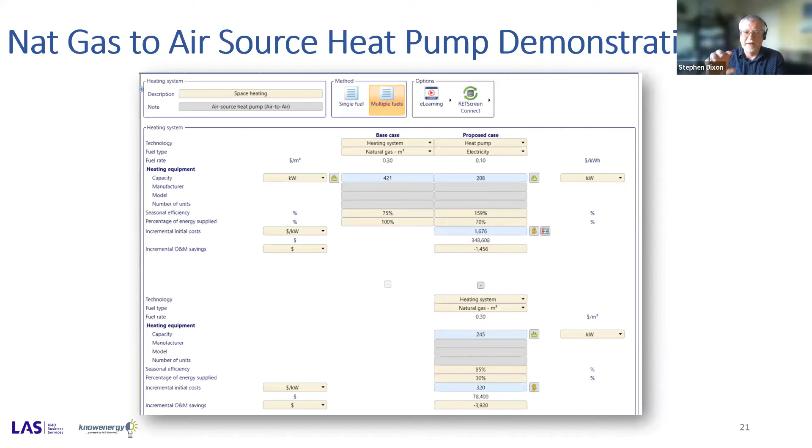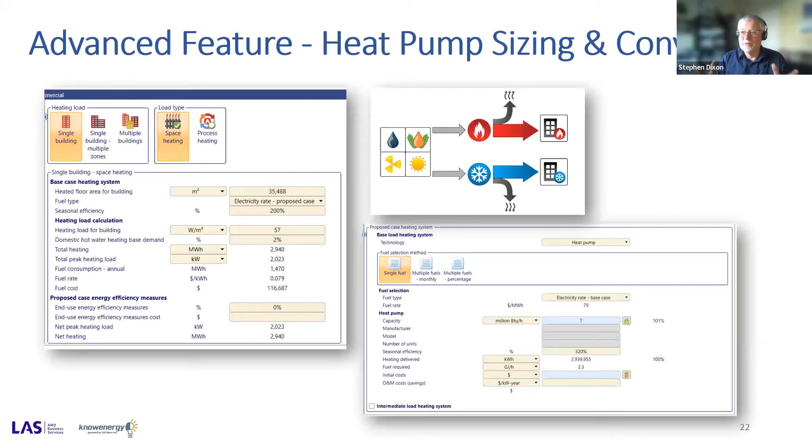All right. Hey, the heat pump calculation you were just talking about, there you go. There's an example. This is actually a rooftop unit using gas, not boilers, going to an air source heat pump. But again, RETScreen has the tools. I just showed those, so we don't need to go into detail here. We can either use what we call the multiple fuels tool to look at the energy side of it, figure out how much energy goes through the heat pump, how much through the existing natural gas system, or we use the power heating cooling model to properly size up that heat pump and maybe build the hybrid system, which is optimal, right? Getting the carbon reduction we want at a reasonable capital cost. So tools are all there.

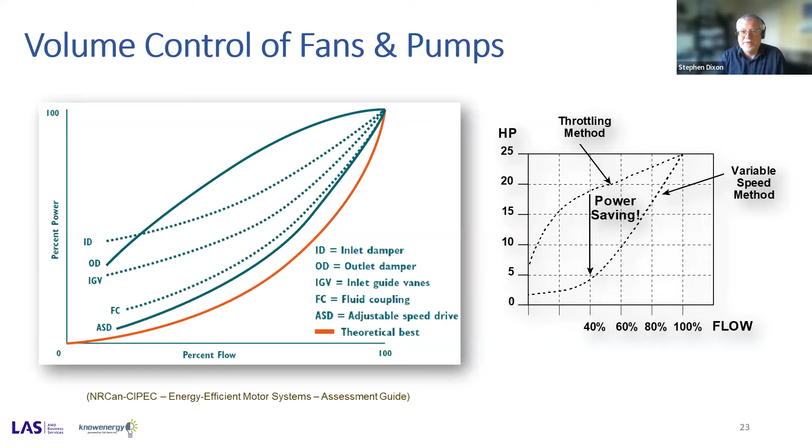I took a look at the pumping example earlier. Well, all of the characteristics of pumps and fans that I have here on the screen are actually embodied in those models, right? So you can model a situation where you go from an inlet guide vane on a fan to a variable speed drive, or maybe you go from that outlet throttling on that massive pool circulating pump I was talking about, the community center, over to speed control, improve the reliability of the pump, and get some really dramatic savings. Again, that was a dial like I showed you before on the pump side. Here's the one in the fan. Same thing, but it deals with all the characteristics of fans that are a little different than pumps.

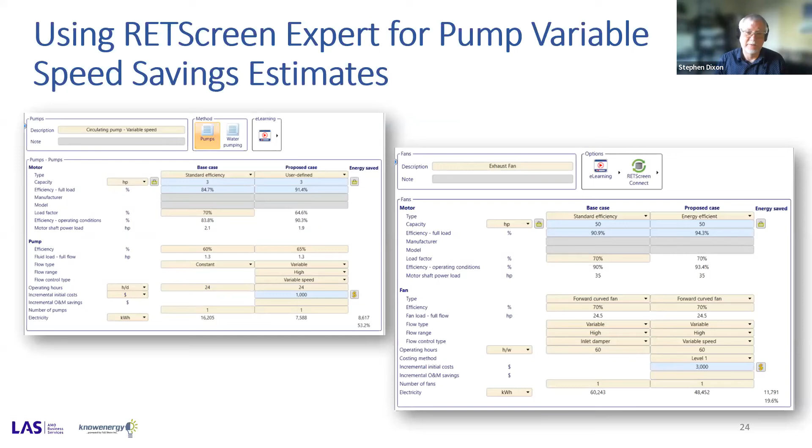Similar, but different. So in a nutshell, feasibility analysis, which can begin from your archetypes, right? Think about that. Don't have to build this yourself. You can begin with your archetypes. You can find your building. You can play with it. You can tweak it, and you can come to a conclusion. Then you can build your own model, right?

You build your base case model. You build all your measures. You go in there, pick the ones you want from the archetypes, or build your own, right? Build out your base case opportunities, get your carbon reduction for the configuration you selected, get your business case, take into account financing. So many things. And also you could build in the carbon tax in there, or a shadow price for carbon, or however you wanted to deal with the fact that carbon is getting more expensive, right? Or you could build it into your inflation rate for your fuels as well.

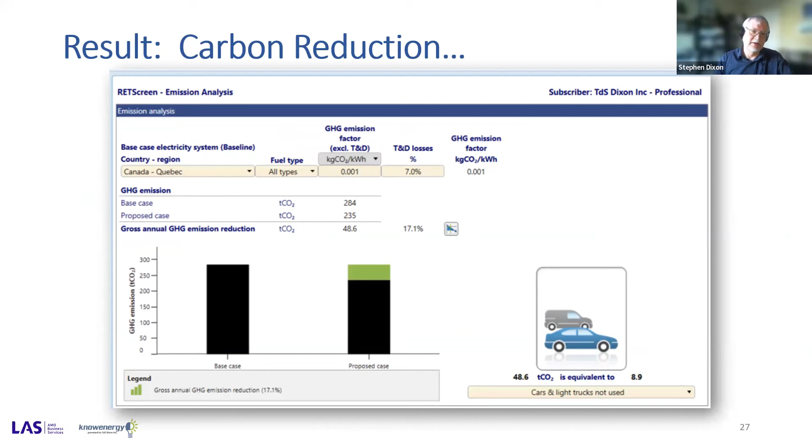Okay, so we've done all these things. Well, the one thing that I would put between here and another workshop is what I call the one-page proposal. If you haven't heard of the one-page proposal, it's a book. Go out and get it. Because if you come up with all this great stuff, now you got to communicate this to somebody else. You got to convince them to let you do the project.

Hey, Greg, we need a one-page proposal module in RETScreen.

But anyway, I have this one-page proposal that I use. It's great. Seven sections, makes a one-page compelling argument, has the financials, but rather than energy, it talks about what's important to the person making the decision. So for that gentleman with that pump in that community center, he didn't care about energy really. I mean, he did and he didn't, right? But he really cared about the fact that it was costing him a pump rebuild every 3 years.

So how I would pitch that to that person would be, avoid your pump seal replacements. Put in this drive, right? It's that simple, right? So get to what's important. Now, somebody makes the decision to do something. A one-page proposal is a great way to get a decision. What do we do to show the savings? That's what we call performance analysis.

And really, before you move on to performance analysis, maybe just clear up a few of the questions in the chat. Sure. I think the only one relating to feasibility is if you can do embodied carbon analysis in RETScreen. No, that's it. And then it's probably a question more for Greg or Christian, about how many municipalities use RETScreen. That's a good question. I can't answer. That's a very good question.

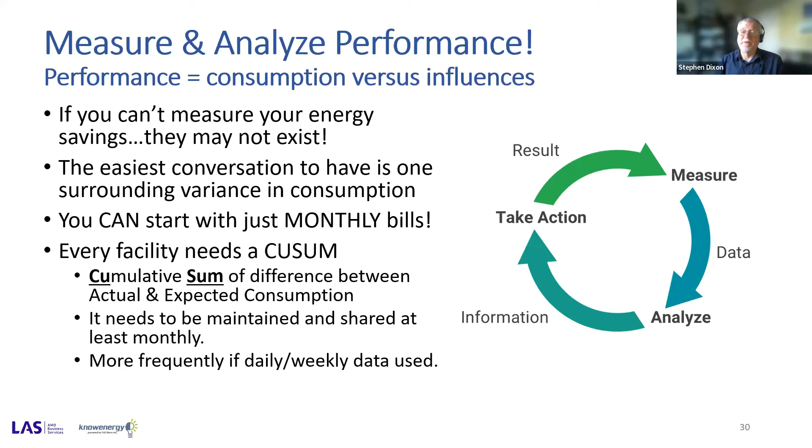So again, if you're reporting in Ontario under EWRB, you can use EPT today, the Energy Planning Tool from LAS. You can take your data to Portfolio Manager. You can do the appropriate reporting. Then you can link your data over to RETScreen and do the more granular analysis, the measurement and verification you might have to do for some of these projects for incentives, or just to prove to council you did what you set out to do.

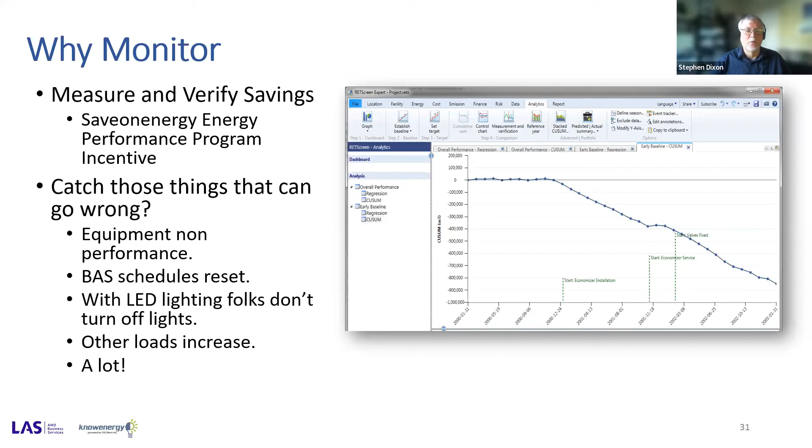So downslope is good. Horizontal is back to the baseline, and we can catch things like that. And it took them 3 months to catch it here. If they had been doing that weekly, they could have saved, I think it was like $40,000. It was huge savings. What can go wrong? Lots of things can go wrong. You can do the improvements, but things can go wrong. You need to be able to track these things.

Here's an example of an office building. They didn't even know what they'd done. Actually we approached them because they wanted to be part of a webinar we were doing. And I said, well, send me 4 or 5 years of their electricity and their natural gas data. When I analyzed it, I realized that they'd made huge improvements. I think it was overall about a 35% reduction in energy.

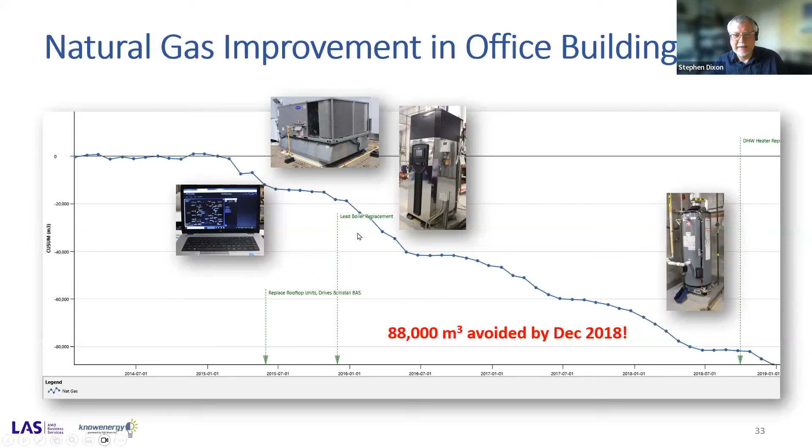Then I said to them, well, I find all these events on my CUSUM curve. These are all generated with RETScreen. What are they? Well, we had a conversation. I walked around the building, took some pictures. Now, RETScreen doesn't overlay the pictures on the graph, but that's a good idea actually. But RETScreen allows you to overlay events on the graph. So I can put the events that led to the downturns in energy, meaning improvements. So it's a great way to document.

Wouldn't that be amazing to put in front of council? This is what we've done in our building. Look what we've done. And it's very visual. I once had a chief financial officer, not of a municipality, but another organization, look at that CUSUM and say, that's an indisputable visual of the results. When the CFO says that's an indisputable visual, good things happen. They offered the facility manager another $300,000 for projects.

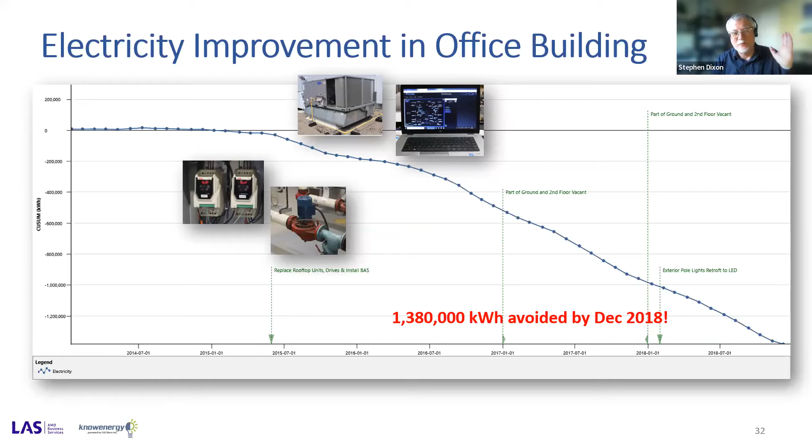What's the best way to get money to do more projects? Demonstrate the virtue of what you've already done. RETScreen can do that very easily, tracking all those things. Greg, we need to have some pictures in there.

So, 3 or 4 steps. I know I make it look easy. I know it's not necessarily that easy for the first-time user. There is a video on this one. If you go into performance analysis in RETScreen, there's actually a series of 15 videos that go through that step by step. Have a look at it. It's not that difficult if you spend a bit of time with it, and maybe you're not the person that's going to do it.

Maybe you've got to, I'm going to hire a co-op student to come in here and do this, right? They love to do stuff like this. They've got all the skills, right? Anybody that's done a basic course in statistics should have no problem working with this tool. It's a great way to do performance.

And you know what? This is a good place to start too, because maybe you've done things in your buildings, but you've not been able to show it, right? If you start doing this and demonstrate what you've done, that's a great way to kickstart things and build momentum in your program as well.

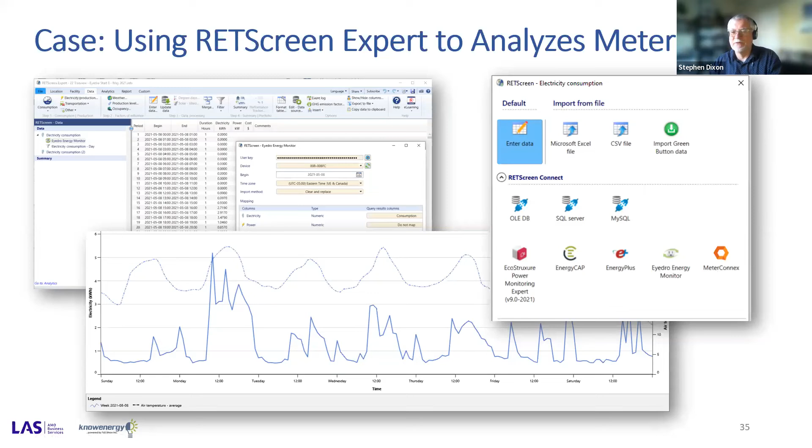RETScreen has connectors to many other things. That's the Eyedro one, you know, the Schneider metering. If you've got data in generic databases, you can pull it from that. Some of the other major players in terms of energy tracking and data management. This is just a sample of what's available today. The latest version has a lot more, right? So great ways to get data into RETScreen. Great ways to visualize data.

I love the weekly time series plot, right? Overlaying temperatures. I also love the heat map because it allows me to see a year. That's a year. All I did was take interval data that I got from the utility via Green Button, dropped it into RETScreen, plotted a weekly plot, and then I plotted the heat map, right? Then I can see the highest, the lowest times. I can zoom in on the weeks that I want to look at.

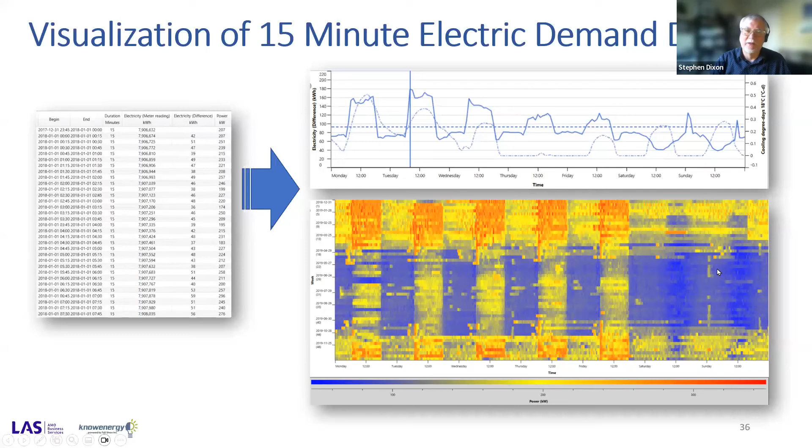Every band across here is 1 week. Every pixel within the band is 15 minutes, right? 52 weeks in the year and 700 or whatever 15-minute intervals in the week. Boom. Bob's your uncle. 1 year in a nutshell. A diagnostic tool to go in and look at how that building starts up. We've used this in a lot of facilities.

There's always an opportunity if you've never looked at a demand profile before, and RETScreen makes it very easy to look at demand profiles. My experience is I did my first demand profile in 1983. How did I do it? I took a camera, right? Photography was my hobby. I took a time-lapse picture of the old thermal demand meter, the mechanical meters. Overnight, I developed the pictures, printed them out, took the readings off the film, and generated a profile.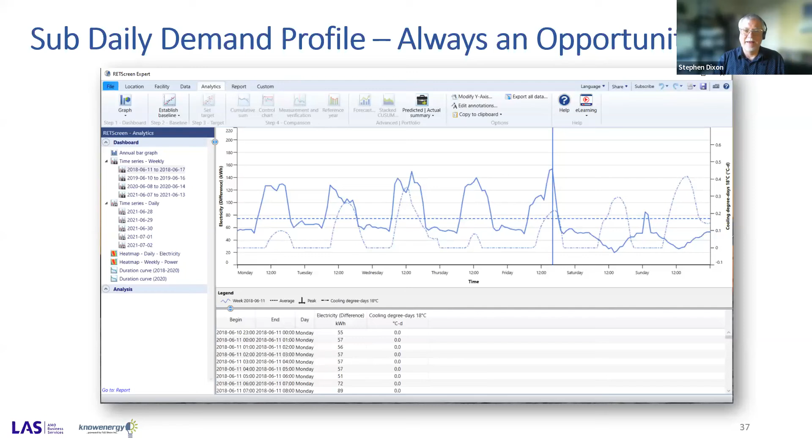1983. Today, it's so easy, and it's still as valuable, right? Get a demand profile, analyze your building, you'll find opportunities. We found cycling compressors in buildings. Look at the cycling of that compressor, right? It's not good. That's not good for the compressor, and it's not good for energy.

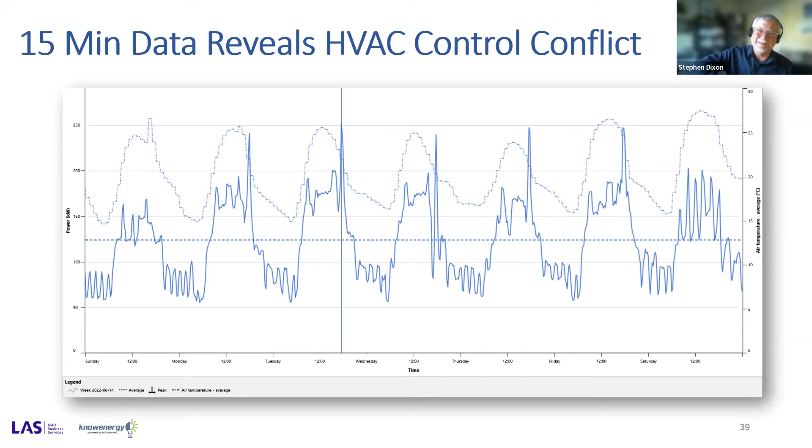We've seen heating and cooling systems. This is a building that went into setup mode. This is a summer day. So at the end of the day, they set the temperatures up, meaning they went from, say, 22 as a set point to 27 to allow the cooling system to back off. Well, the heating system kicked in to raise the temperature to 27. So you see this huge demand spike, right? So there's so many things that you can find using this interval data.

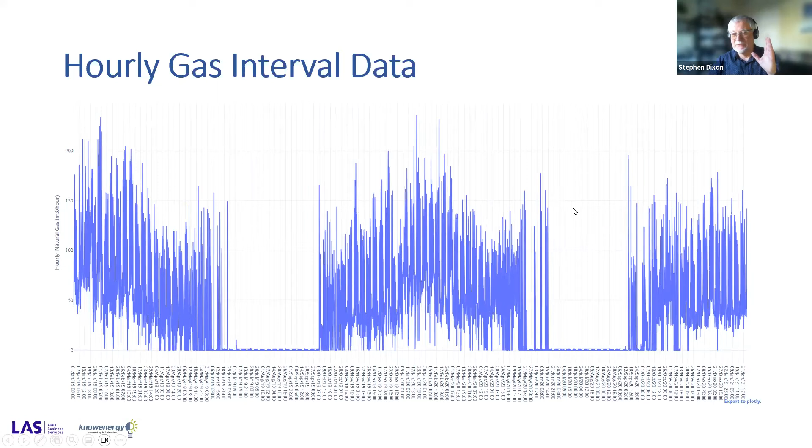You can look at your gas data on an interval basis, right? Meaning on an hourly basis. You can see that in June, you've got boilers firing, 3 out of 4 boilers firing in this building. That's not a good situation from a maintenance perspective, and it's certainly not a good situation from an energy perspective. We were able to spot that within minutes using a tool like RETScreen. There's the heat map for that. So where are those boilers? Look at the boilers firing right here. This is the summer. We can see the consumption of gas all through here. It's a problem.

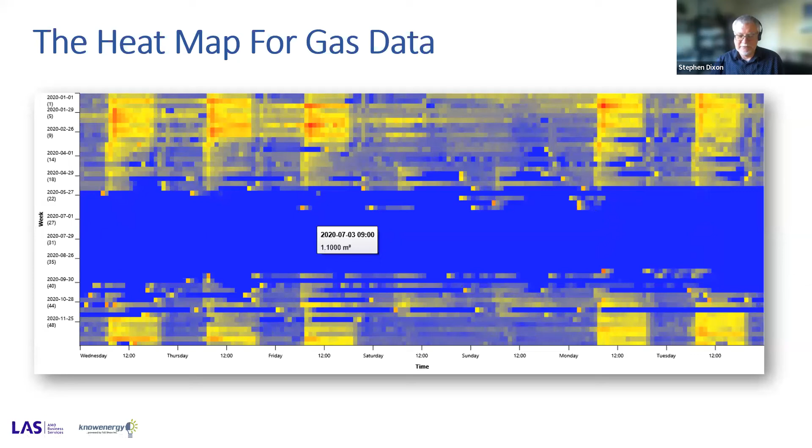Those boilers had a problem with their sequencing controller, right? So you can spot that so quickly in RETScreen. And if you want to know what size heating equipment you need when doing a heat pump conversion, if you can get that hourly data for natural gas, and you're starting to see that now in a number of buildings, I can look at this curve and I can say, okay, well, 3% of the time the consumption is above 80 or 160 cubic meters per hour.

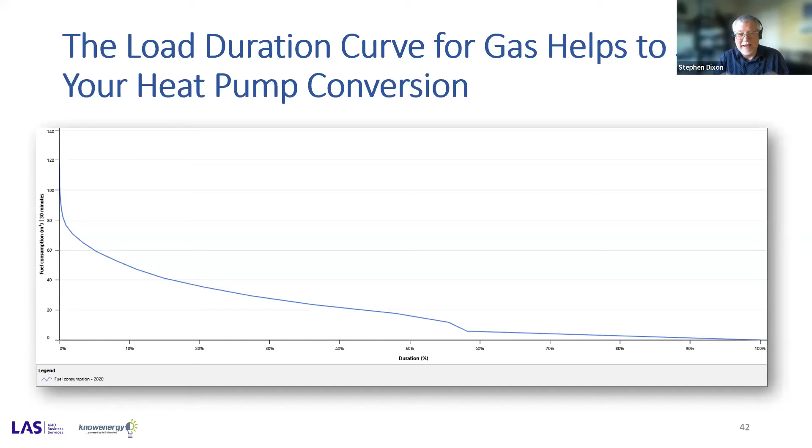I can convert cubic meters per hour to BTU per hour. I can size my heating equipment. Then I can figure out how big a heat pump I need. I don't need to guess. I can look at the data. RETScreen allows me to look at this. The load duration curve, really powerful tool.

Okay, portfolio analysis. This is where we get to look at more than one building, right? So there's a very simple portfolio view. This is a sample portfolio in RETScreen, just to show you if you want to try this one yourself. I'll just go out to the main screen of RETScreen. So portfolio example right here. You just click in here and you'll get to see the same view, right? It's a sampling of multiple buildings that RETScreen has assembled.

And some of them are feasibility analysis, some of them are benchmarking, some of them are benchmarking feasibility, some of them are performance. So you can bring in buildings you've analyzed in a number of different ways into a portfolio. You can slice and dice a portfolio using the filtering tool, so you can segment it for different purposes. Some of them are transportation, buildings that are greater than 10,000 square meters, some in Ontario. You can basically slice and dice a portfolio.

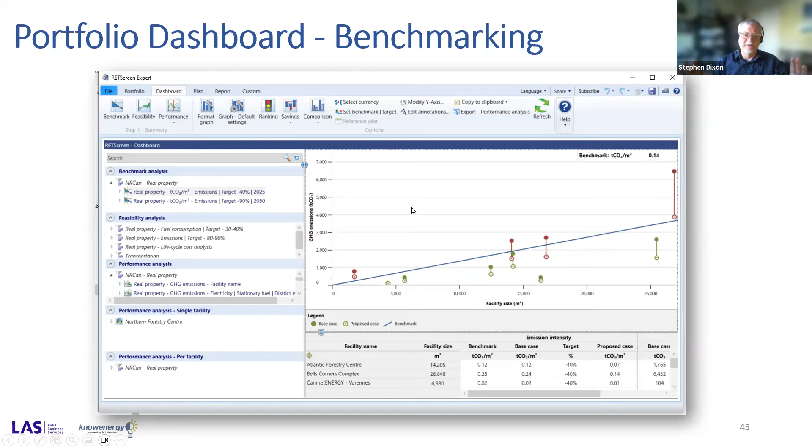So these are buildings where we built base and proposed case, and then we brought them into a portfolio. We can look at them all in one glance to see how they're performing, see where they're at. And we can look at this over time as well. Base case, proposed case, right? So this building starts out above the line, comes close to the line at the end. Base case, proposed case. So the objective would be to bring all your buildings back down to this benchmark or your target. You can put it in as a target as well, right? I love that graph. It allows you to see everything very, very quickly.

There's a custom dashboard. So in RETScreen, you can go in and you can actually create these. I talked about this earlier. So you had the standard reports that you can use. Those are pre-configured reports and very easy to PDF. Custom dashboard, this is where you get this canvas. You can go in and custom design what you see on the screen.

You can create a kiosk. There's a kiosk function in here so that you could then have a computer which displays on a monitor in the lobby of your building showing the progress you're making. You can create those little progress indicators down here on the right-hand side, and they are normalized, right? So basically, you can build your own custom presentation out of all the data that's either in individual RETScreen files or in your portfolio. Very powerful tool.

Now, I mentioned this before, and I'll mention it again, right? If you're using the energy planning tool in RETScreen, for those that are using it, you probably know about it. For those that aren't using it, you may want to talk to Christian because it's got some really nice virtues.

Well, the nice thing about it is it has a planning feature where you can go in and build your plans that are required under the municipal or Ministry of Energy regulations in Ontario, right? You can build your plan. It has a plan builder, but it also has a place to store all your energy data and your projects as well. That's right.

Speaking about the energy data, that's the data you need to report under EWRB here in Ontario. So you can export the data from EPT to Portfolio Manager. There's a video you can look at on LAS's website to tell you how to do that. Now, that's just the beginning. So now you fulfill the reporting requirements. Now, let's get really going at it.

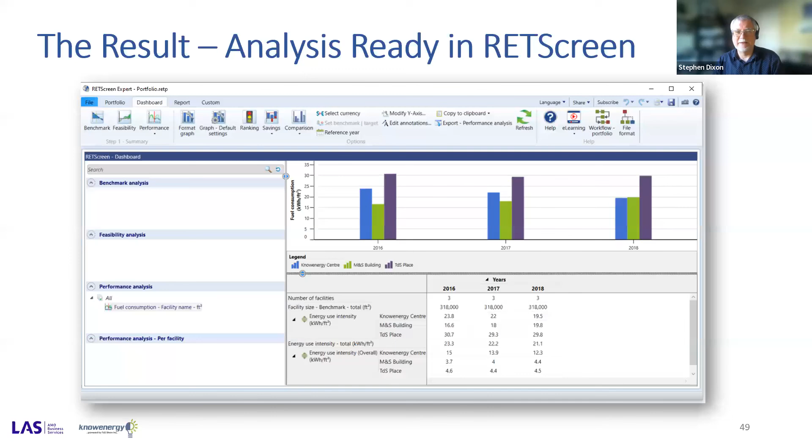Now, the beauty of this is that you're going to have to collect that data. You're going to do it in EPT or some other way. You're going to get it into Portfolio Manager, whether it be from EPT or something else. Portfolio Manager has data cleanup tools. Most of the data coming out of Portfolio Manager already has a lot of the problems eliminated. So by the time you get to RETScreen, you can pull your sleeves up and really begin to analyze this stuff properly.

All right, the net zero planner. In this session, which is very close to our ending time here, I don't want to try to explain this whole thing. What I want you to do is go and see Kevin Burke from RETScreen, who on Tuesday in English, and I think yesterday or the day before in French, did an hour-and-a-half webinar where he went through this net zero planning tool, right? Which is where you begin with those archetypical buildings that I talked about before.

And this is done for a selection of buildings, right? You take a selection of buildings which represent a portfolio for you. RETScreen builds you a portfolio based on the settings that you ask for. So you can actually tell it, for example, how to deal with the electrification of heating. That is, do I want to simply stick with my gas furnace, or do I want to consider the gas furnace, the boiler, an air source heat pump, maybe electric heating, and so on?

And how much do I want to leave on gas, and how much do I want to take all over to electrification? I can set all those things, right? I can set the financial factors that are considered. I can set whether the electricity grid is going to get cleaner over time. If I have a target of 2050, then what's going to happen leading up to 2050 to the electricity grid in terms of the carbon, right?

I can also tell it where to find, we've had a number of questions about the emission factors. I can tell it which database to use for the emission factors, right? I can tell it how to deal with photovoltaics, right? That is, what percentage of the roof area or ground mounted photovoltaics is it allowed to work with? What we're doing is we're really setting the parameters for the software to go out there and find the optimal

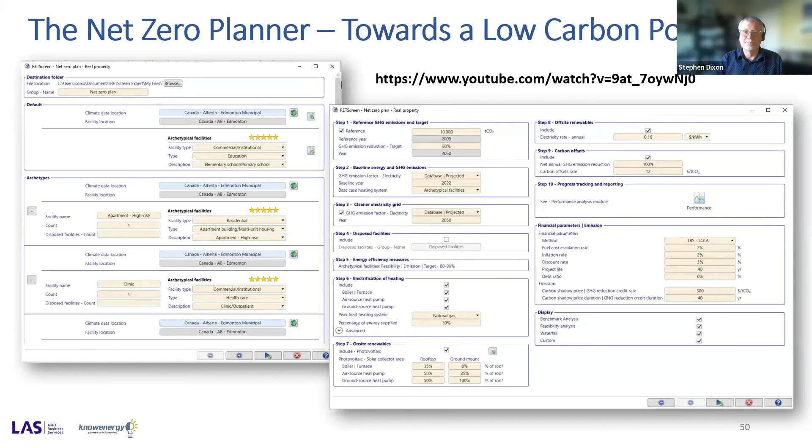And actually, there were a lot of questions around that in that webinar, and Kevin did a great job of showing us how we would use the net zero planner and the archetypes to move back and actually create our own fulsome portfolio by the time we're done. So that's all I'm going to do, because that 90-minute video does way more than I can even do in the next 10 minutes, but I'm not going to try to jam it in. So I'm going to finish off here. I'm going to leave a few minutes for a couple more questions.

But you know, I started off by telling you that RETScreen was an all-in-one project tool. I truly believe that, right? There's going to be things you can't do, but there's just a lot of things you can do. And if you're using another tool like Energy Plus, it's an hourly simulator. You can actually take the results of your other tools and bring them in here to RETScreen as well. I'm not going to go there right now, but you can import those in, and then you can merge them into your projects and into your portfolio.

So RETScreen will not only provide a lot of functionality, but it will also alert where it can't deal with something. It allows you to merge the results from the tool that can deal with that into what you're doing. So again, that's an all-in-one project tool, whether it takes it from a very fundamental level or whether it just receives data from other sources, one way or the other, you can bring it all together in RETScreen.

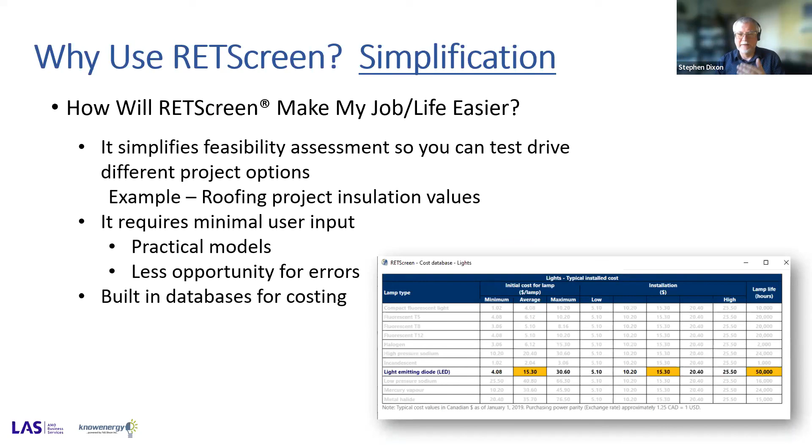And I'm going to give you a few reasons. I'm not going to read through all these, but why use RETScreen? You can read them in the slides afterwards. Simplification. It does simplify a lot of this stuff, right? You can test drive the software and have a look at that, but it has a lot of the things we need, like the cost databases. Standardization, right? Using the right factors for things. Because of the databases that are all built in, it allows us to standardize things.

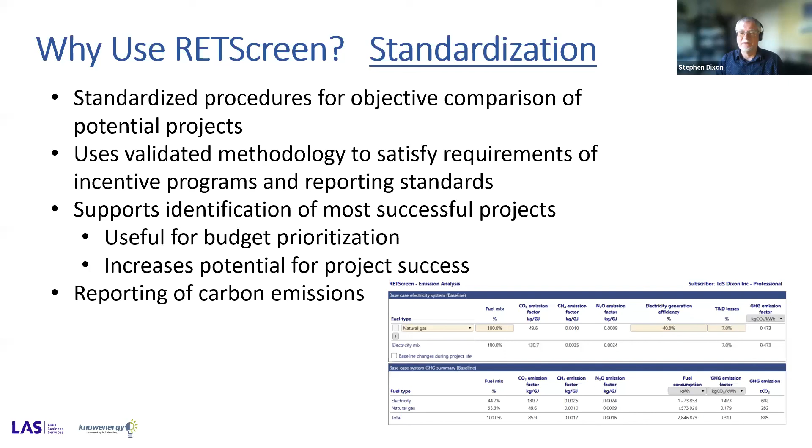I know a couple of municipalities that, when they go to quotations and when they look to consultants or vendors, ask them to submit a RETScreen model along with it. That's standardization to make sure they can compare one bid or one proposal to another one. If you've got one person using this tool and one person using that, how do you compare those things? What's the basis for comparison? Standardization allows us to make good decisions, and the standardization also comes from using the rich databases that are available for emissions and costs and all those different things in RETScreen.

Persuasion. You've seen some of the charts on the screen. There's the progress indicators for the custom dashboard. It has lots of tools for persuasion. They could be charts, the indisputable visual results, the CUSUM. It could be a report, or the dashboard, or maybe it's simply doing a good, solid financial analysis and showing the net PV, the IRR, the benefit to cost, or what I call the savings to investment ratio. All of those things could be persuasive, and they could all be assembled and presented quite nicely, quite attractively from within RETScreen.

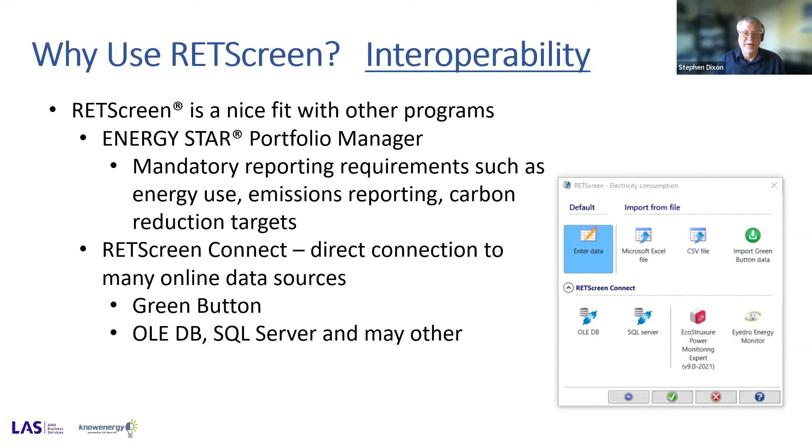Interoperability, the ability to get data from different sources. I talked a little bit about the portfolio manager interface. I talked about the Eyedro interface, but RETScreen has that ability to interchange data. You can also push data the other direction, but it's more about bringing the data into RETScreen, but it doesn't trap your data either. You can get it out. I know that's always a concern for some people. Your data's not trapped with RETScreen, but if RETScreen does their job, you'll want to leave your data in RETScreen in the long run, quite frankly.